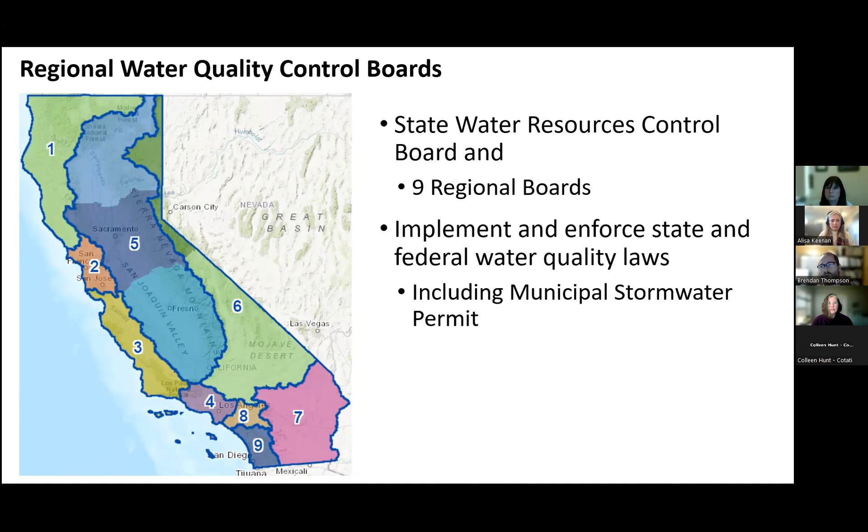And so the purpose of the training today, primarily it's a permit requirement of the permittees. And when I talk about the permittees, those are all the cities and the county under this stormwater permit here in the Russian River watershed. And the post-construction stormwater requirements under the stormwater permit are complicated, and they change over time, and they use this LID manual to ensure that projects are complying with the stormwater post-construction requirements.

And so every year we want to make sure that the regulated community is up to speed with what is in the LID manual. We want to make sure that the permit requirements and various interpretations of the permit requirements are discussed and understood, with the goal of ensuring we get consistent implementation of the stormwater permit. And also this training is a great opportunity to discuss the permit.

So I want to go over some terms and acronyms that you'll be hearing today. BMP is a big one. That refers to, in the world of stormwater, any structural or non-structural strategy to control stormwater. And when we're talking about LID, we're talking about low impact development, which is a specific subset of best management practices.

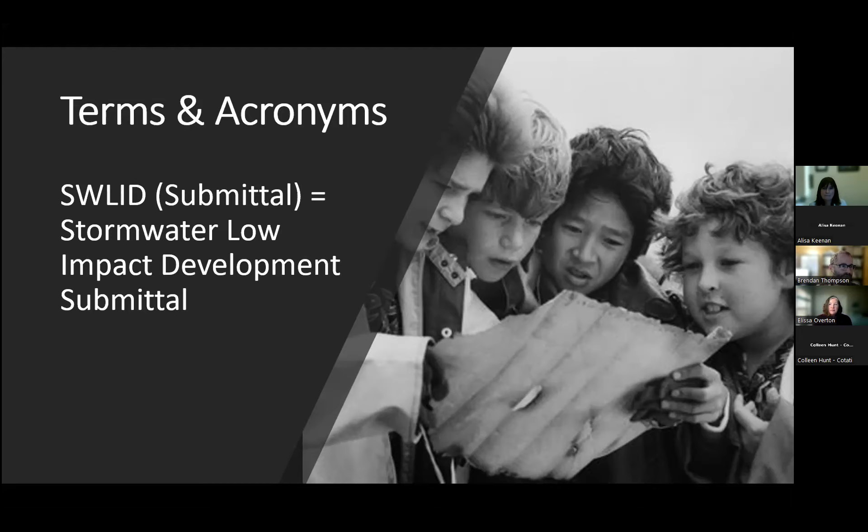TMDL, Total Maximum Daily Load. This term comes from the Clean Water Act, and it refers to the maximum amount of any given pollutant that a water body can handle and still be a healthy water body and provide the beneficial uses to people and the environment. And you hear it a lot because a lot of regulations are based on it. The TMDL in itself is not a permit requirement. Instead, it's a plan to bring an impaired water body into an unimpaired condition. And it uses permits to do that.

So when water board staff or planning staff develop a TMDL, they also develop an action plan. And part of the action plan is to recommend which specific permits should have requirements that will implement their action plan. And the MS4 stormwater permit is a major vehicle to implement TMDL requirements. So that's one of the reasons why we have these LID requirements.

For instance, our board recently adopted a pathogen TMDL to deal with bacteria impairment in the Russian River watershed. And we anticipated this back in 2012 when the current permit was adopted, and Santa Rosa and Sonoma County had to prepare pathogen work plans. And in the next permit, the rest of the permittees will have to do something as well to implement the action plan associated with the pathogen TMDL.

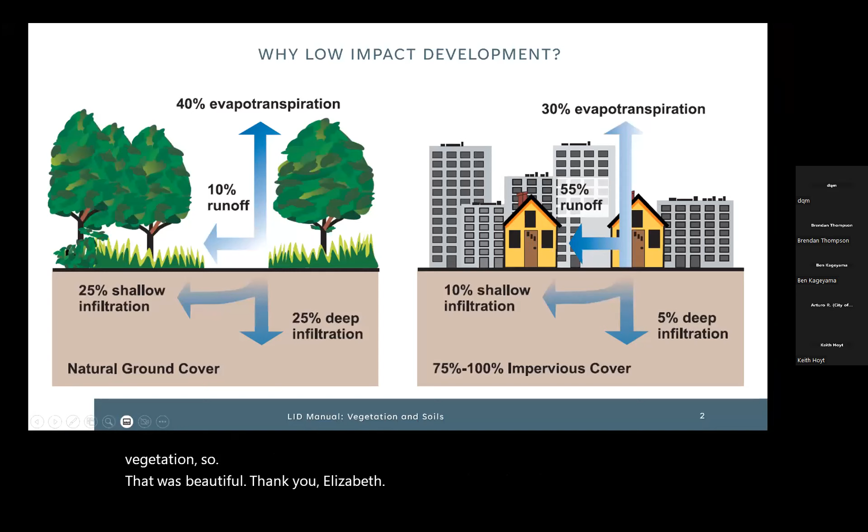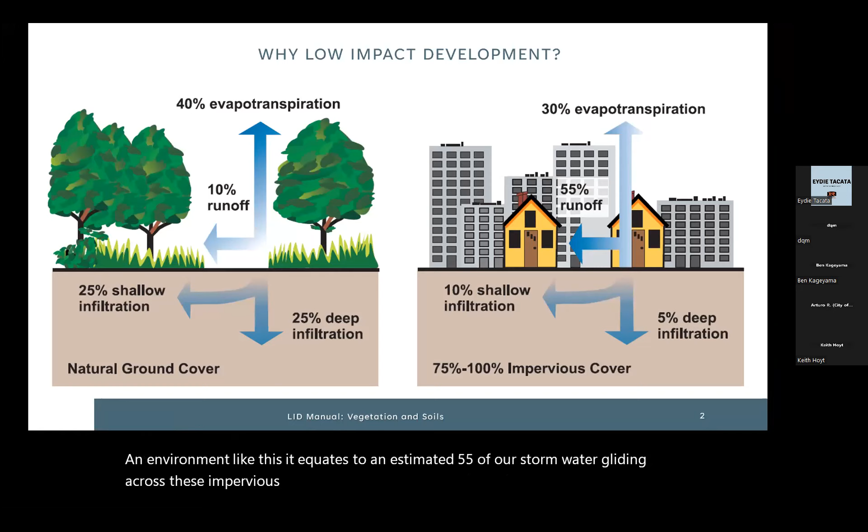So first, why are we so passionate about LID? In the image here on the right, there's a dramatic increase in the amount of hardscape that will not allow water to permeate or infiltrate into the soil and recharge the aquifer. In an environment like this, it equates to an estimated 55% of our stormwater gliding across these impervious surfaces like roads, parking lots, and rooftops. And it warms up that water and it gathers sediment, oils, tire wear particles, construction runoff, heavy metals, viruses, bacteria, nutrients from pet waste, and so on. So many constituents to list.

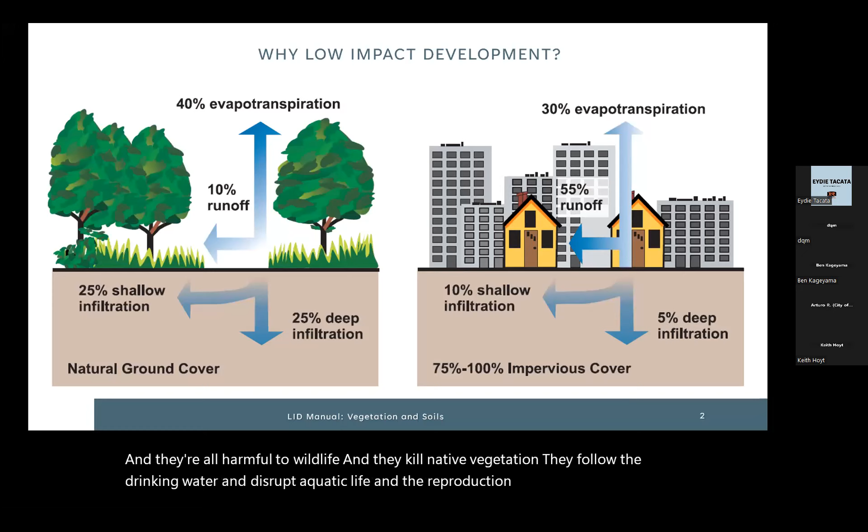And these constituents go directly into our streams, our rivers, our lakes, and so on. And they're all harmful to wildlife, and they kill native vegetation. They foul the drinking water and disrupt aquatic life and the reproduction cycle. The water is going to pick up tremendous erosional speed on these surfaces. So by the time it reaches these sensitive waterways, the excess volume can blast out stream banks, vegetation, and wipe out aquatic habitat. The stream bank can't absorb water fast enough at that magnitude, so it's going to cause flooding.

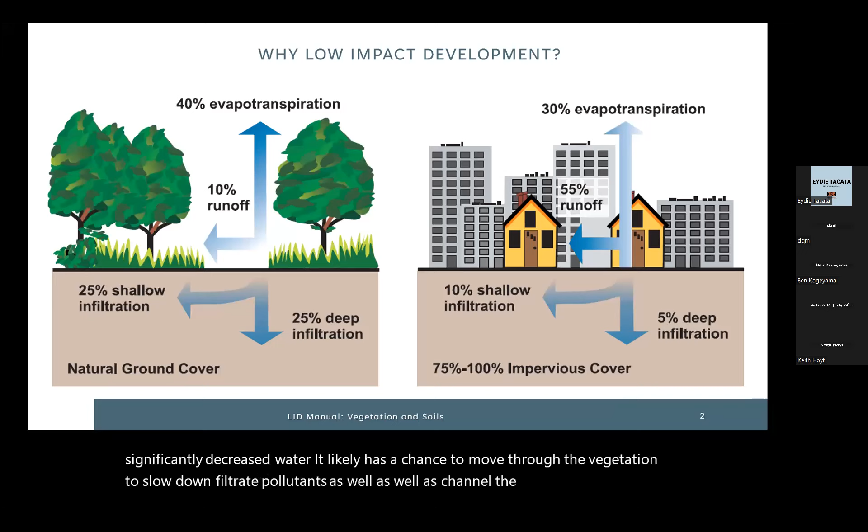In the image on the left, you'll notice that in a natural environment, the runoff is significantly decreased. Water likely has a chance to move through the vegetation, to slow down, filter pollutants, as well as channel the water deep into the aquifer. Notice there is a 20% difference in deep infiltration here. And evapotranspiration, well, that's going to increase as well.

This came up weird, so I have to click on the different screens to get this to progress. So sorry, guys.

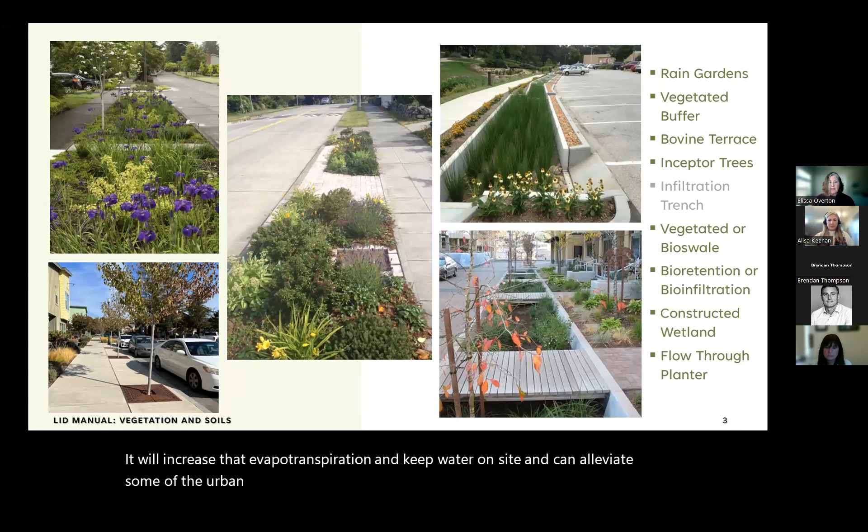So incorporating LID is just one of the ways we can reduce the impacts of development. By maximizing the surface roughness and creating infiltration and filtration opportunities, it will increase that evapotranspiration and keep water on site. It can alleviate some of the urban impacts to our water. Another great benefit is trees, soil, and the aquifer. They all will sequester the water, and that will boost our waterways during the driest months of the year when we see no rain, which is very typical in this region, as we all well know.

And not all LID features include vegetation. Those that do not, such as an infiltration trench, are part of a treatment train where the water is going to be introduced to vegetation at a different part of the path.

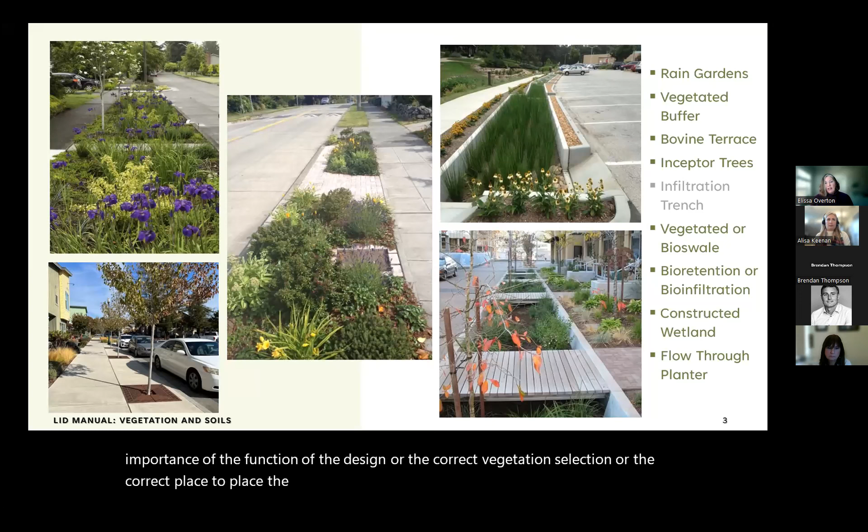And plant selection and design are very important pieces that are determining factors in the success of these features. But sadly, they're often left until the end, and the design is contracted to someone who wants to make it look pretty, and they don't understand the true importance of the function of the design or the correct vegetation selection or the correct place to place the vegetation. We find that these features are sometimes plugged into the design at the last minute, and there are potentially safety hazards.

So, for example, in this image up here on the left, you'll notice if you parked alongside this feature, it's going to be really difficult to get in and out of your car. So while beautiful and functional to clean water, it's not functional for pedestrians.

Great solutions are shown in this middle photo with pavers, or down here with these cute little path bridges up to their front steps.

Up in the right-hand corner, this parking lot, great, you can get in and out of your vehicle, but there hasn't been a lot of thought to the pedestrian foot traffic. You need to get from point A to point B. You're going to need to cross over this feature, and stir up sediment, compact soil, kill vegetation. Not a lot of people want to walk all the way around. They'll take the path of least resistance to get from point A to point B.

Another thing to think of is tree placement or high bush placement. If they're put out on a corner, they can obstruct oncoming views such as traffic, and that's another safety hazard.

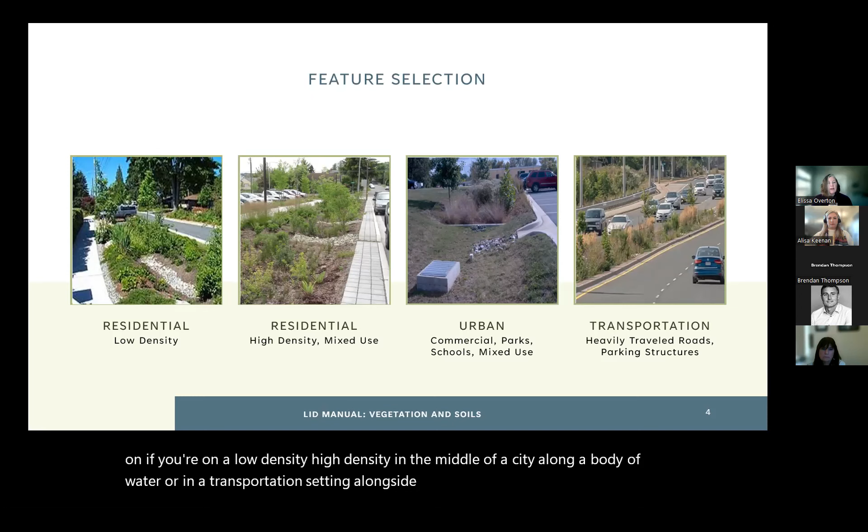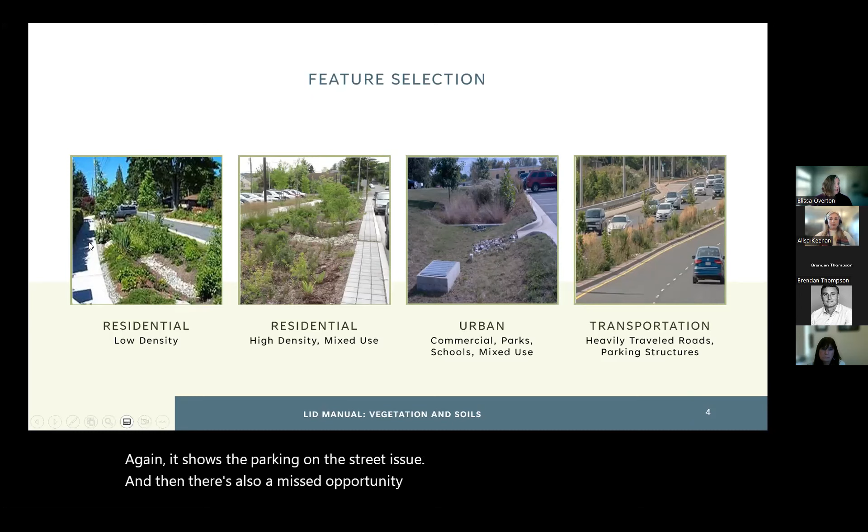So the types of plants and features you choose may be different depending on if you're in a low density, high density, in the middle of a city, along a body of water, or in a transportation setting alongside the road. The residential image, again, it shows the parking on the street issue. And then there's also a missed opportunity here to plant the lowest level of this swale. We really want to get those grasses in there, the sedges and the rushes, to slow the water, infiltrate and permeate water into that soil.

Rocks, while sometimes beautiful, can really dry and heat up the soil, and it will make it difficult to maintain. Weeds love that rocky environment, and it will make it difficult to pull them if the soil is pushed down with the weight of the rocks. And if you put fabric underneath those rocks, it's ultimately going to just clog.

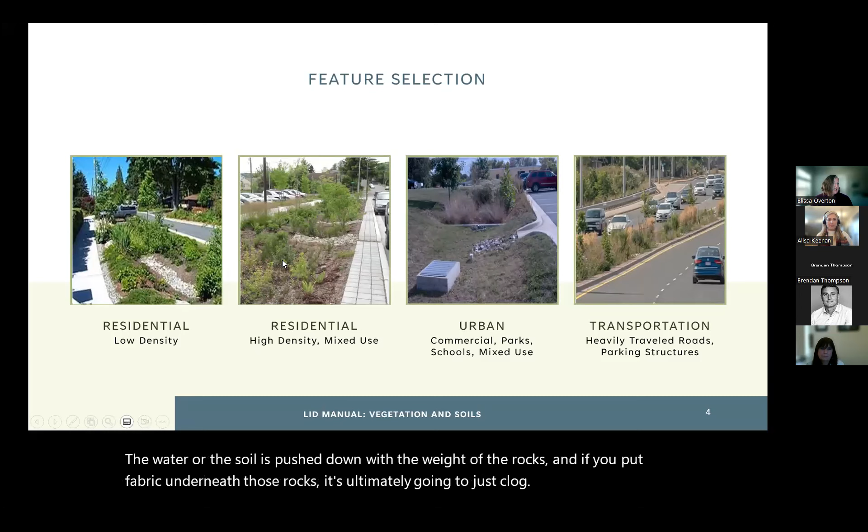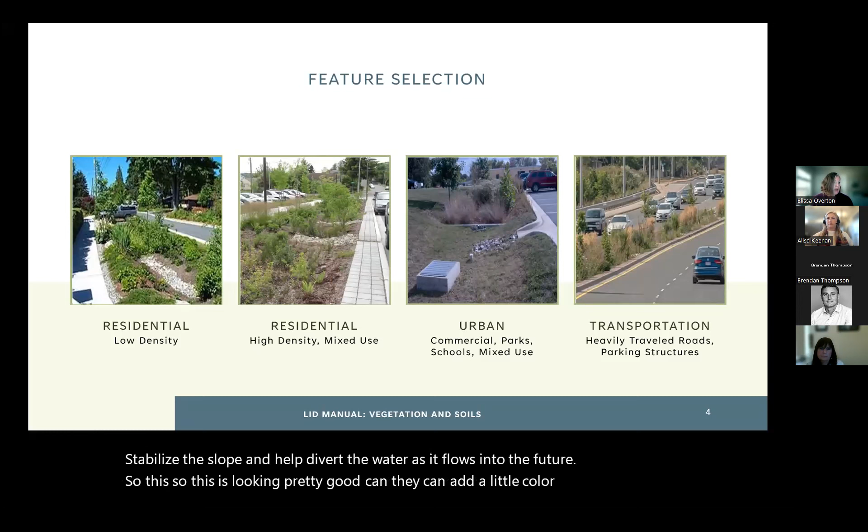The high density residential, I really like the rocks that they've placed to stabilize the slope and help divert the water as it flows into the feature. So this is looking pretty good. They can add a little color, and they've corrected the street parking issue here.

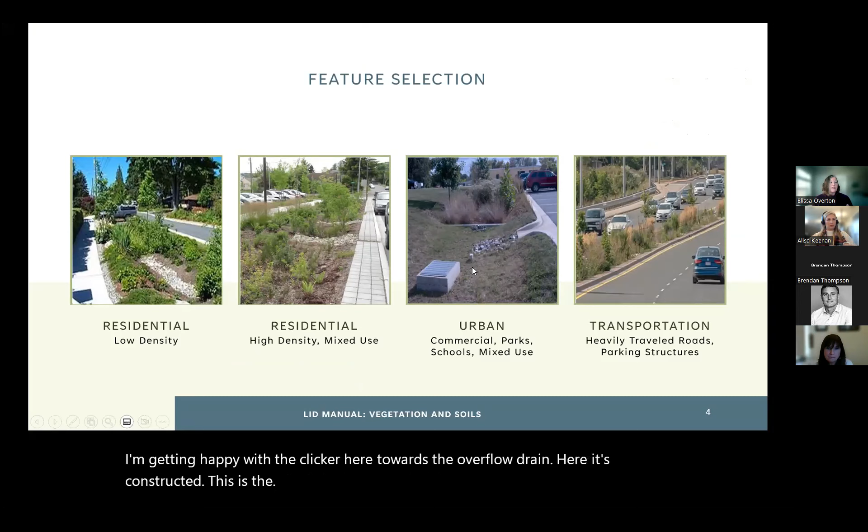The urban setting, now while I wish they had planted further in towards this, woo, I'm getting happy with the clicker here, towards the overflow drain here. This is the thing I want to note on this: it's constructed at the correct height. The function of this feature is for water to come into it and fill up to allow it time to permeate, not over 72 hours, because we don't want to add other issues such as mosquitoes or flooding. But we don't want these drains like you would construct your bathtub or sink. We need them raised up to allow that water time to infiltrate.

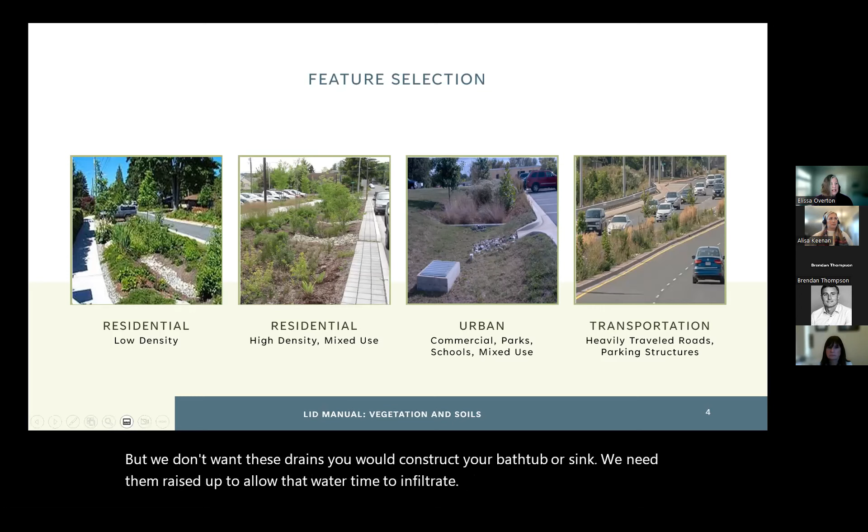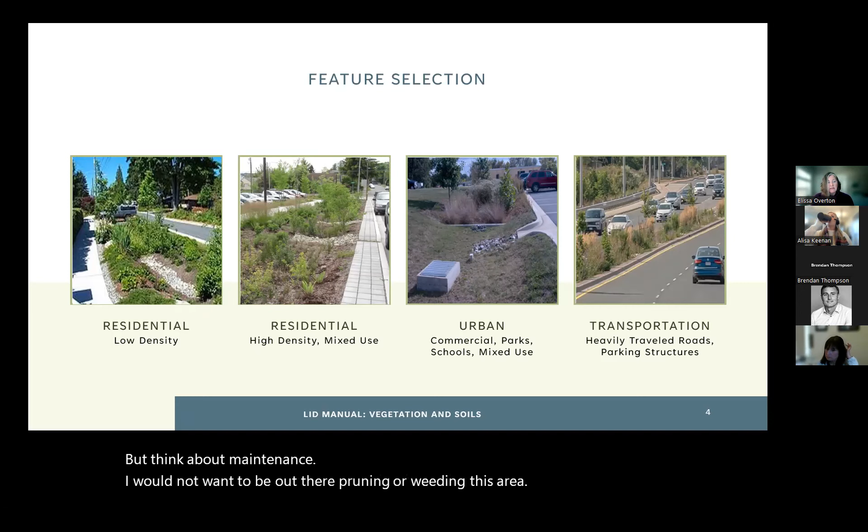Transportation. This is great for source pollution control. There's little inlets to let water into that vegetative strip in the center of the busy 4-lane road. But think about maintenance. I would not want to be out there pruning or weeding this area. And also it could potentially obstruct views if there's an area further up where you can turn in or out. So just really be mindful in your design on placement of these things.

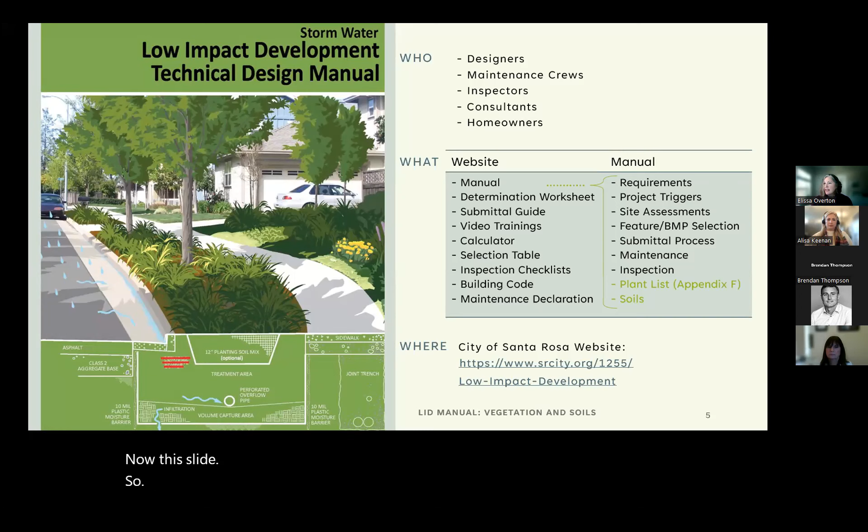Okay, so now this slide. This is the LID manual, and Edie, I can't access the chat, so if you wouldn't mind pasting the link in the chat to get to this manual on the City of Santa Rosa website. I know many of you are already using this manual, but we have people of different experience levels on the call. So I just wanted to quickly direct folks to this manual and what a great tool it is.

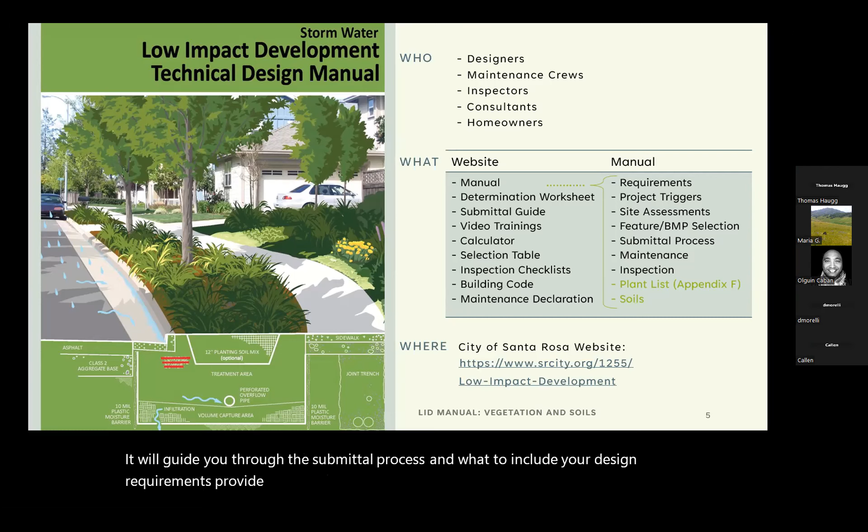It will guide you through sites that will trigger LID, help you with feature selection in natural areas, pollutants of concern, trash capture. It will guide you through the submittal process and what to include, your design requirements, and provide useful calculations and formulas such as hydromodification control requirements, 100% treatment requirements, and delta volume capture. Maintenance and inspection requirements are included, as well as the BMP fact sheets that outline feature details and inspection checklists for each type. And of course, our plant list is included as Appendix F, and soils, which Elizabeth will be going over in just a moment.

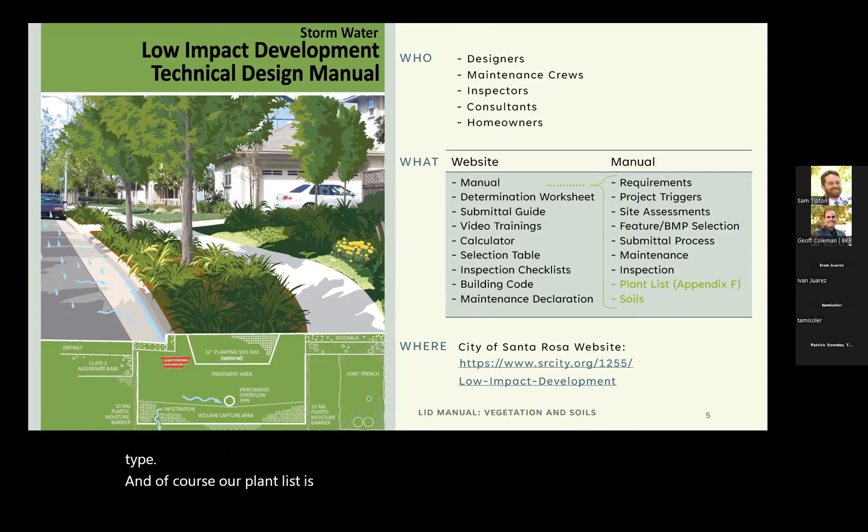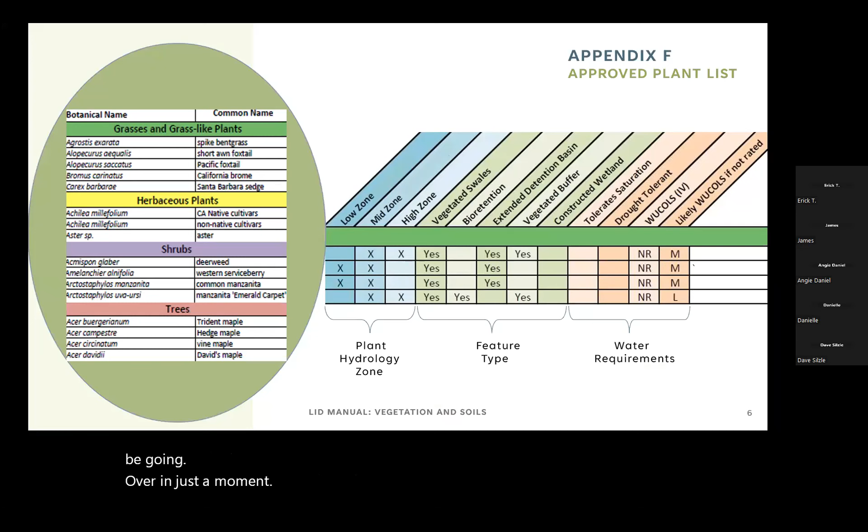So here we have a little cutout of Appendix F. You'll see where the plants are separated by growth structure. So your grasses, herbaceous, shrubs, and your trees. Now, this is just a little clip of it. These lists are very long, and there's pages of ideas for you, for your plants, planting your features.

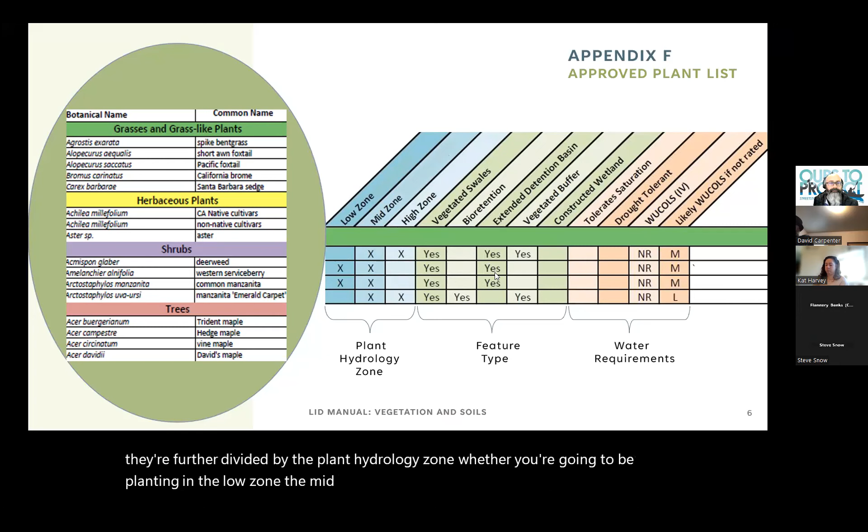And then they're further divided by the plant hydrology zone, whether you're going to be planting in the low zone, the mid zone, or the high zone, the feature type. So you'll see the different types of features listed up here, and the plants are listed on the left here. And then the water requirements that those plants have. So it's really useful.

So what's the big deal about plants? We're really asking a lot of them. Well, basically, they're the janitors, the cleanup crew. They're going to provide filtration of sediment, the constituents, keep the mulch from going down the drain, and the trash. They clean the air through carbon sequestration.

They're plumbing. So through infiltration, they're going to drive water back into the soil to replenish groundwater supplies, recharge the aquifer to redistribute the vegetation in the dry months, and help maintain the base flow to our streams, rivers, and wetlands. So really important stuff.

They provide housing for different types of species, create different ecosystems. Habitat is a really beneficial part of these features. The food, they're going to attract food for different types of birds and other species, and they can support pollinators.

They are the HVAC, so they create microclimates to allow species to keep warm in the winter or cool in the summer, counteract the harsh rising temperatures of hardscape. Structural engineers, they're going to stabilize that soil and prevent erosion and stop additional sediment from entering our storm drains, thus suffocating and preventing fish eggs from hatching in our streams and rivers.

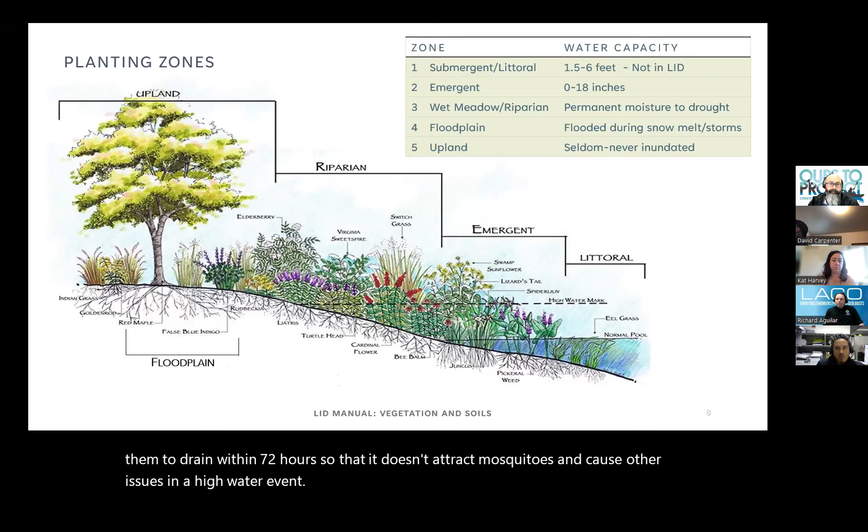The emergent riparian section, that's where we're really going to focus on that low level planting. It's the lowest point of the LID feature and should be planted in a way that can slow and filtrate water. That's the main function, and stabilize that soil. They need to be able to withstand full saturation as well as drought conditions in the dry months. Grasses and sedges, those are the workhorses in this section.

Grasses and sedges, they have the deep fibrous root systems that not only hold onto the soil, but they form numerous root channels. So they really stabilize and promote water soaking deep into that soil. The soil part, Elizabeth will dive into some more later on.

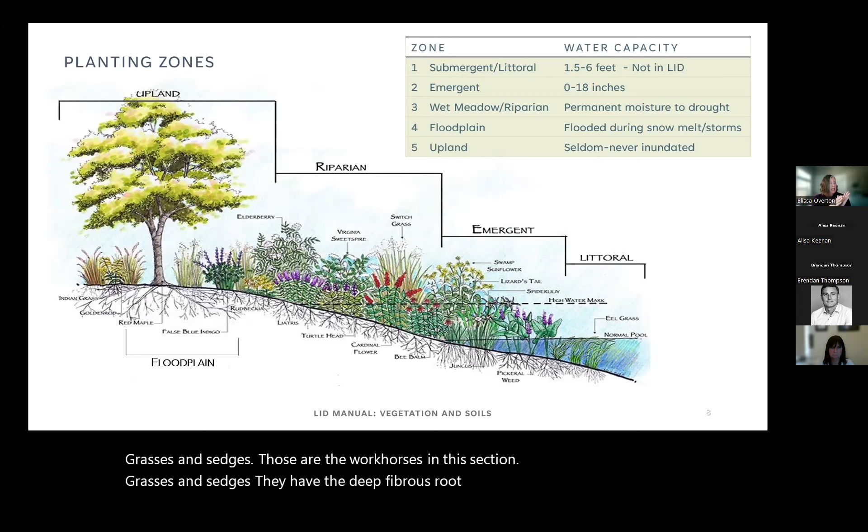The riparian and floodplain areas. I have floodplain down here. It's kind of a mixture between the riparian and the upland. You're going to want to use this area as your beautifying area. So, you know, salvias, sages, spice bushes, wax myrtles, blanket flowers, all these beautiful types of plants can be planted in this area because they can withstand more water, but then also be able to handle a drought. Because sadly, that's what we are undergoing right now.

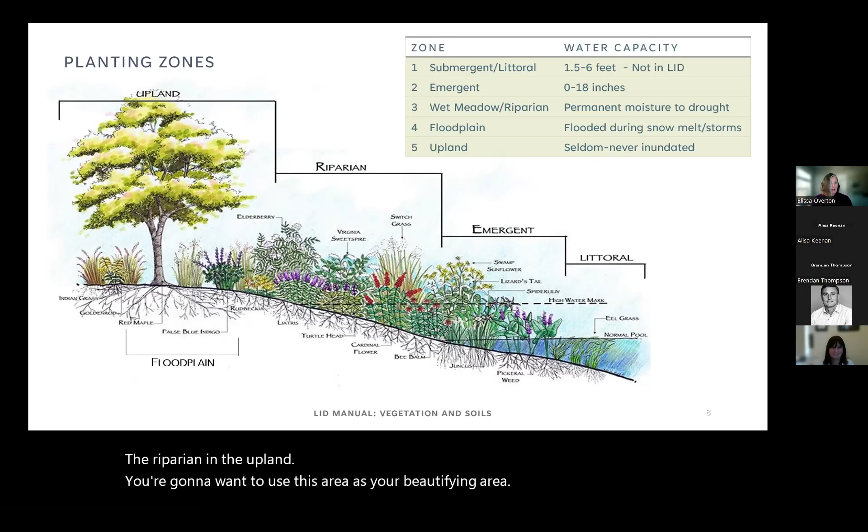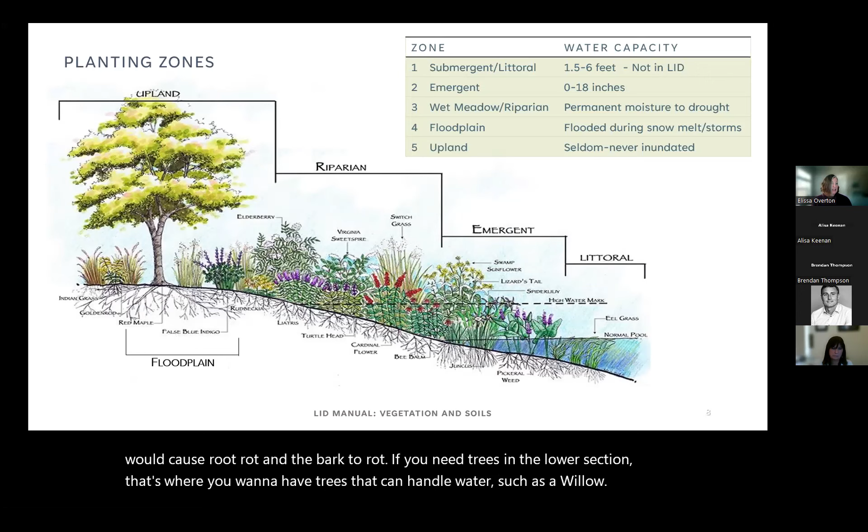And then in your floodplain, upland areas, that's your opportunity to put your trees that can't stand full saturation because it would cause root rot and the bark to rot. If you need trees in the lower section, that's where you want to have trees that can handle water, such as a willow. And then up high, you want your drier plants to use as beautification and shade and habitat, and really promote the aesthetic value of these features.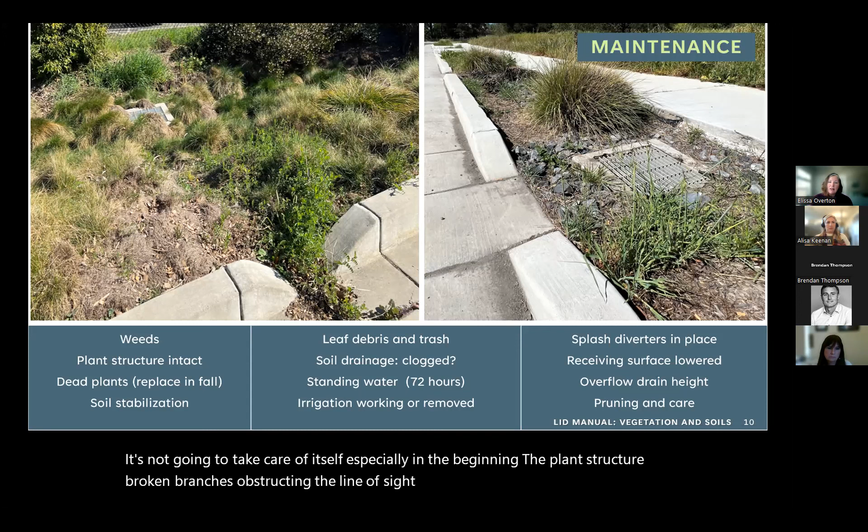The plant structure, broken branches, obstructing the line of sight, or just for overall plant health, they need to be taken care of. Dead plants, replant them, preferably in the fall, so they can get the benefit of the water during the wet months of the year. Tree debris, so if you have trees, deciduous trees and evergreen trees both shed needles and leaves, so that needs to be picked up.

And my natural resources geek side, that sometimes is hard for me because I want to allow those things to fall and replenish the soil, feed the soil, and I think of the microbes and all that stuff. But these types of features, they're not for that. There's other opportunities to create that in our communities. These are assets, they have a function, they need to remain clean and free of that debris.

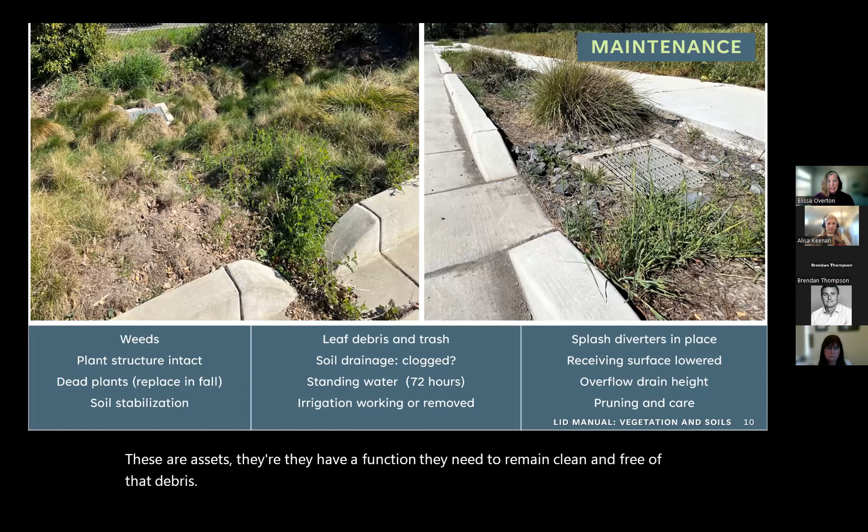Soil stabilization. So make sure that those plants are alongside the slopes of the feature so that it really holds on to it and isn't adding to the sediment issue. Irrigation. So this is a big one. I come out to these sites and it's just a mess. The emitters are not within the root zone.

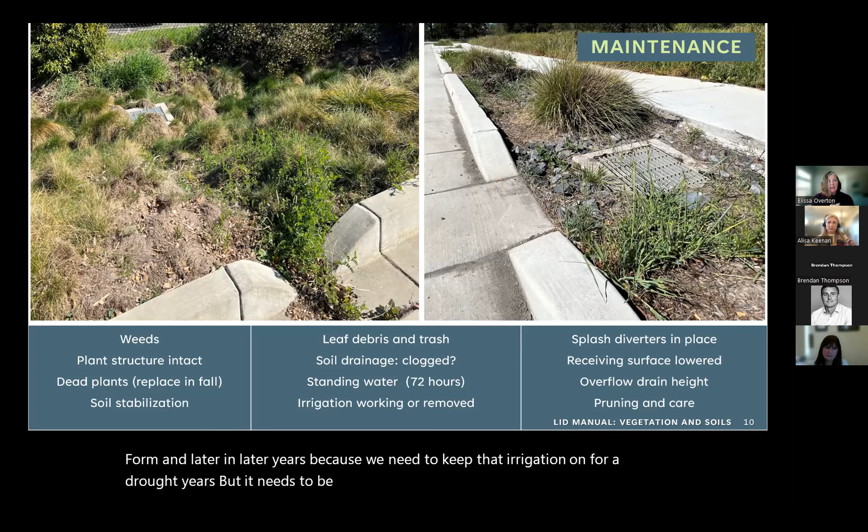The root ball of a plant in the first couple of years of life is immediately under that plant, and those emitters need to be directly on top of the soil, providing that plant with water. Off to the side will work as those roots really start to form in later years, because we need to keep that irrigation on for drought years, but it needs to be regularly irrigated in the first couple of years. So that's another misconception. Just because they're low water use, that's after establishment.

So splash diverters, those are another thing that are very important. We see those just kicked to the side or all over the place, and those are really going to stop that high water flow, preventing erosion. And then overflow drains. So I mentioned before that nice overflow drain that was really high up. Look at this one right here on the right. It looks like a sink drain.

So what's going to happen is water, if it can make it in there through the rocks, it's just going to go directly down in that drain, and it's not going to receive the benefits of the plants. While weeds are still going to provide benefit, they're not going to provide aesthetic value. And then pruning, again, making sure that this inlet is clear so that the water has a chance to come through here and go through the sedges and the rushes before it enters the drain, and ultimately it would pool around here, and this would only be an overflow situation.

And then you'd want planting. These need to stay over 50% planted to be functional. So this is just going to cause sediment to rush down here. In this scenario, over in this area, there is a trash receptacle hut for this community building.

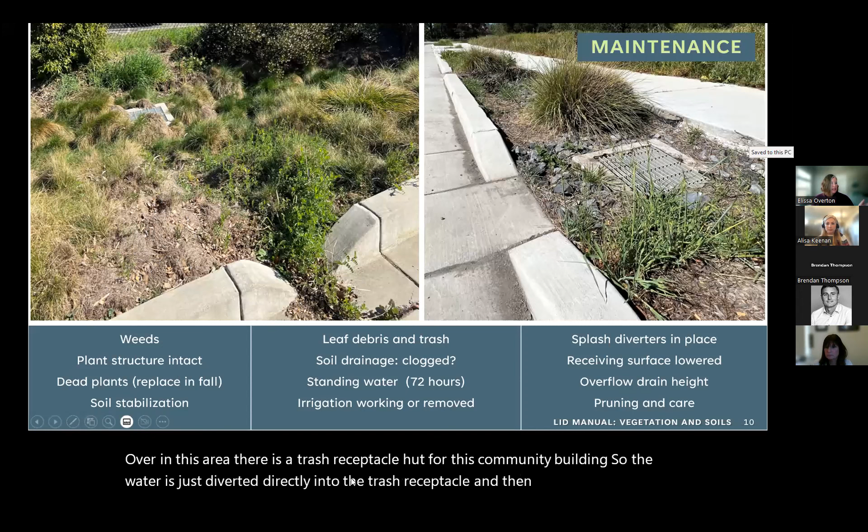So the water is just diverted directly into the trash receptacle. And then there's further LID features on the other side. So it goes through the trash area and then into another LID feature. So it should be entering here and diverting the trash area, ideally.

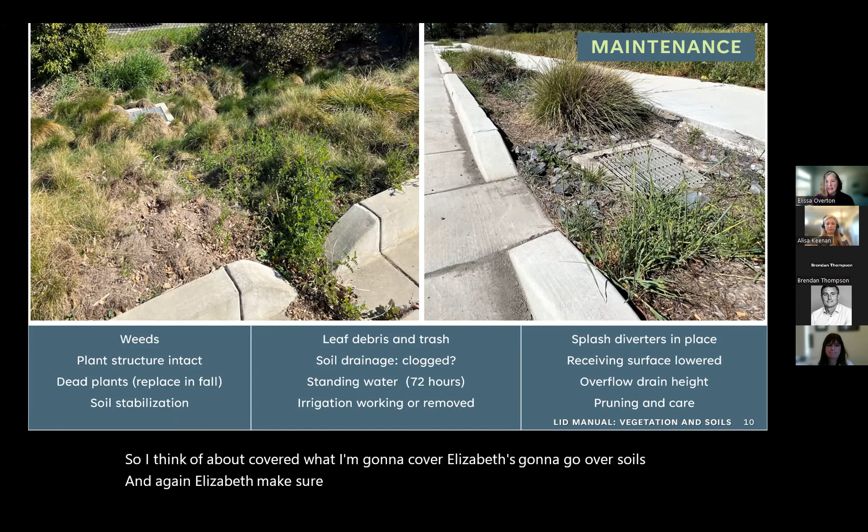So I think I've about covered what I'm going to cover. Elizabeth's going to go over soils, and again, Elizabeth, make sure you add in anything I might have missed in my spiel here. Okay, thanks. Okay, let's move to the next one there.

Thank you. Okay, so let's talk soil, media, and mulch. Whoops, go back. Not yet. There you go. Okay, so what's the problem here? So terminology, consistency. We need consistency in our LID terms, from the stormwater LID report through design, construction, and landscaping installation. So the team of those involved from design to maintenance can really understand the intent of the feature. So let's take a deeper look at the terms.

Next slide. Oops. My mouse is really happy here. Back one. There we go.

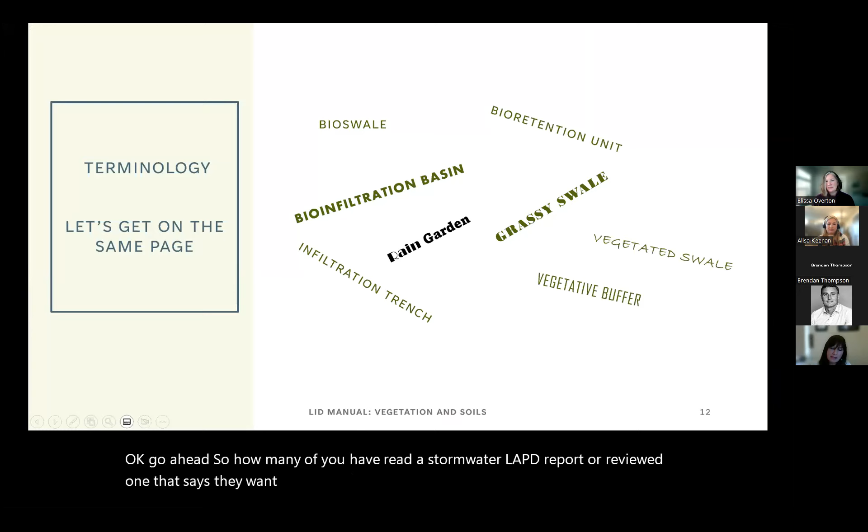So how many of you have read a stormwater LID report or reviewed one that says they want to install a rain garden? Oh, but then the plans call it a bioretention BMP. And then the maintenance plan calls it a vegetated swale. The contractor calls it a grassy swale. And the landscaper, who's just getting familiar with these features, calls them all just bioswales. We have to separate these terms and use them consistently. Next slide.

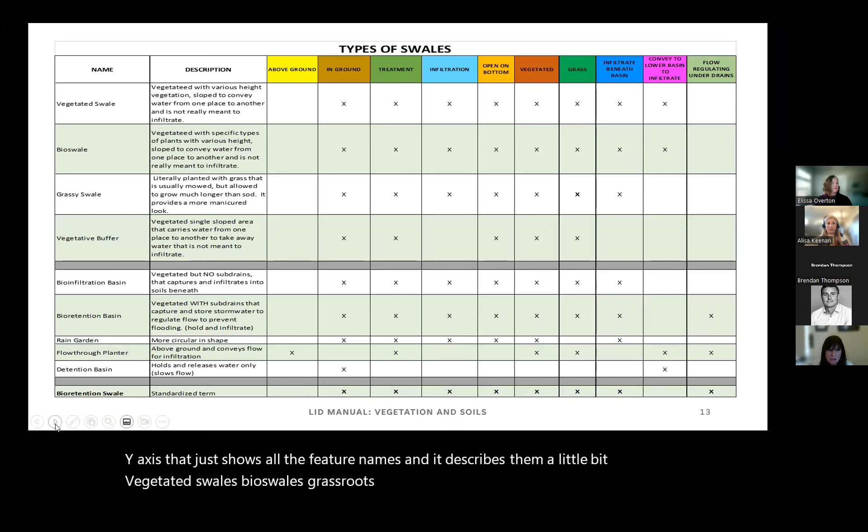So I created this table to better understand the differences between these. So on the left, there's the y-axis that just shows all the feature names, and it describes them a little bit, you know, vegetated swales, bioswales, grassy swales, vegetated buffers, bioinfiltration basins, on and on. On the x-axis, it shows the various variations in function. This is really important to understand the differences, so we can use these terms more consistently throughout all of our jurisdictions. And it can be used to train the contractors and landscapers better.

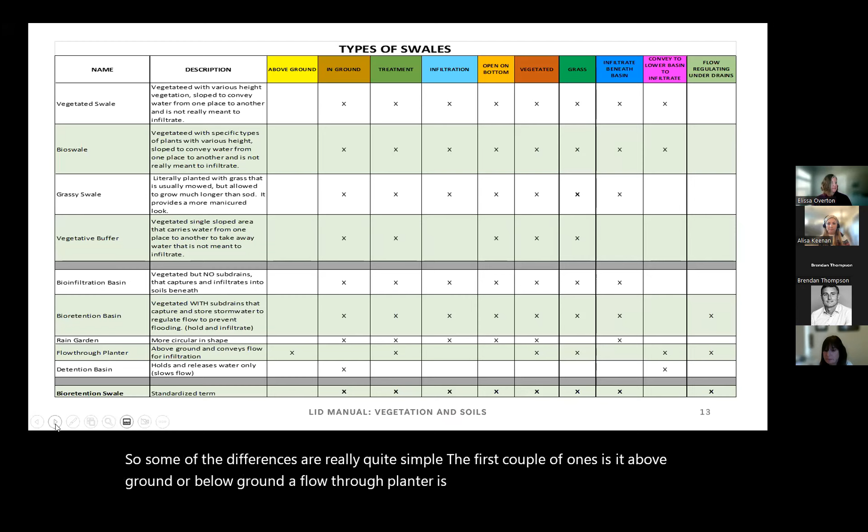So some of the differences are really quite simple. Like the first couple of ones: is it above ground or below ground? Well, a flow through planter is above ground. A swale is not, period. There, you're done. The shape: if it's a circular shape, more like a rain garden, or linear like a swale. If it's linear, call it a swale. Don't call it a rain garden.

If it's on a single slope, it's not a swale. A swale has a parabolic or a trapezoidal shape. These single sloped features are more like vegetative buffers. If there's an underdrain infrastructure, then it's bioretention. It's not a bioswale. And if there are plants or not, it's a bioswale and it's not an infiltration trench. So let's look at a few examples. So move on to the next one.

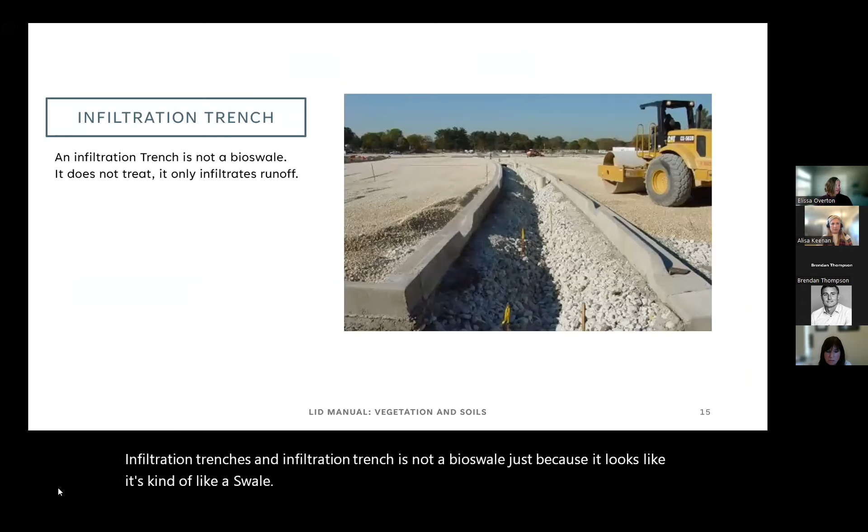Infiltration trenches. An infiltration trench is not a bioswale just because it looks kind of like a swale. It doesn't have plants and it doesn't provide treatment. So don't call this a bioswale. Call it the infiltration trench. Next.

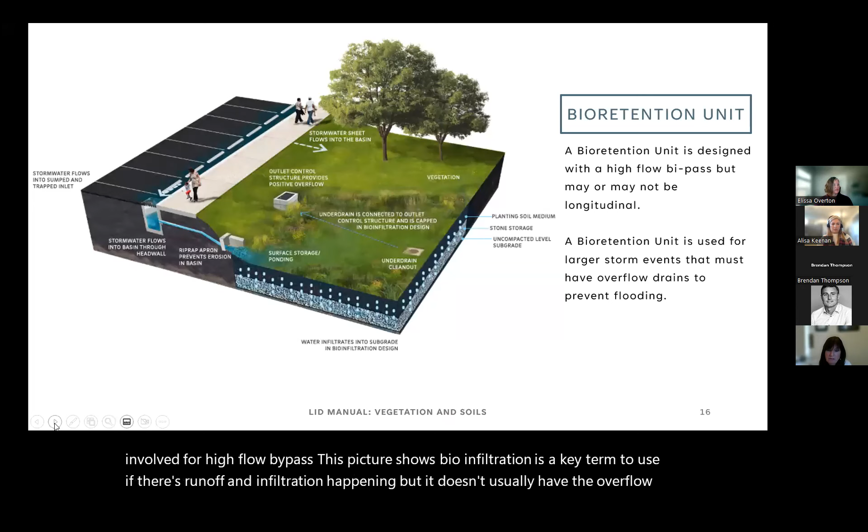So bioretention is used if there's piping involved for high flow bypass, like this picture shows. Bioinfiltration is a key term to use if there's runoff and infiltration happening, but it doesn't usually have the overflow pipes. If there's overflow piping, use the bioretention term, don't use infiltration. These terms are important to distinguish between our LID features. And it's also a good idea to go over these features at, say, your pre-con meetings with your contractors so they can fully understand the purpose of each of these features and the delicacy of these features.

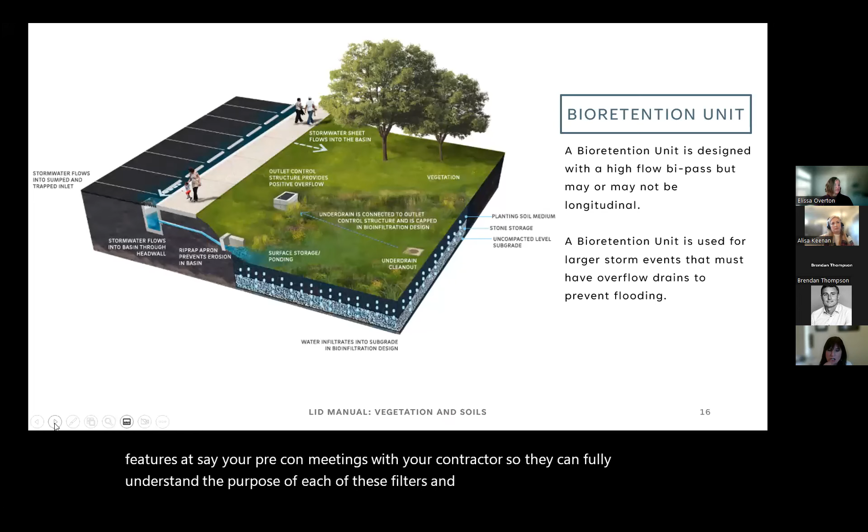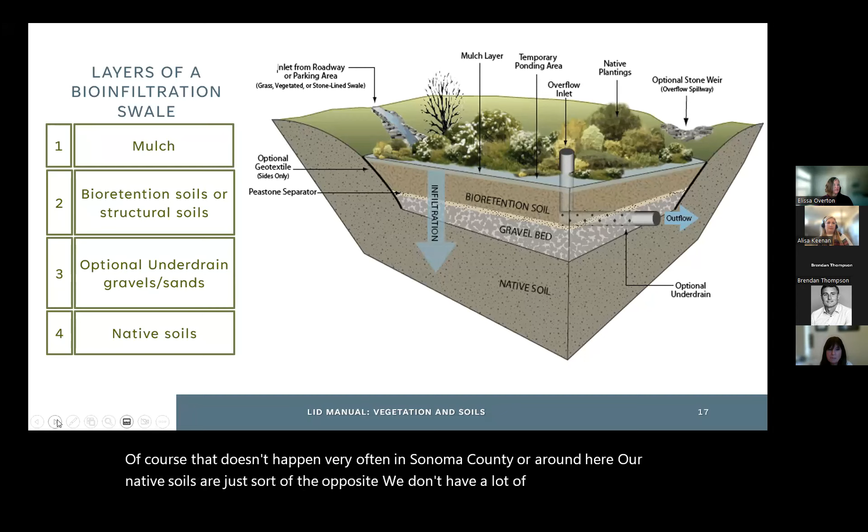Next. So let's talk a little bit about soils. Oops, I think you missed one. Oh, okay, let's talk about soils. Go to the next one.

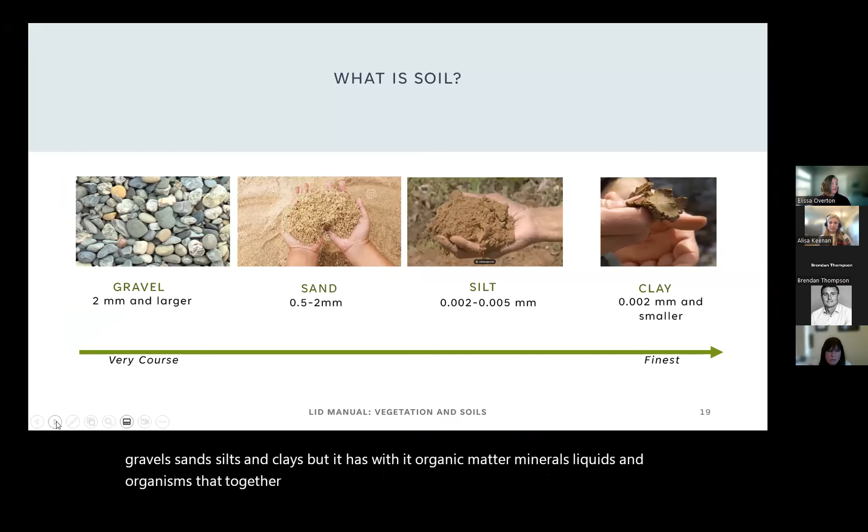Okay, there we go. So what is a soil? Let's talk a little bit about that. So soil is a mixture of sizes of grains of gravels, sands, silts, and clays, but it has with it organic matter, minerals, liquids, and organisms that together support life. So how do we characterize the soil? For our purposes, we'll characterize the soil by the size of the particles. The LID manual separates the soils into hydrologic groups of A, B, C, and D. But let's see how this relates to the particle size.

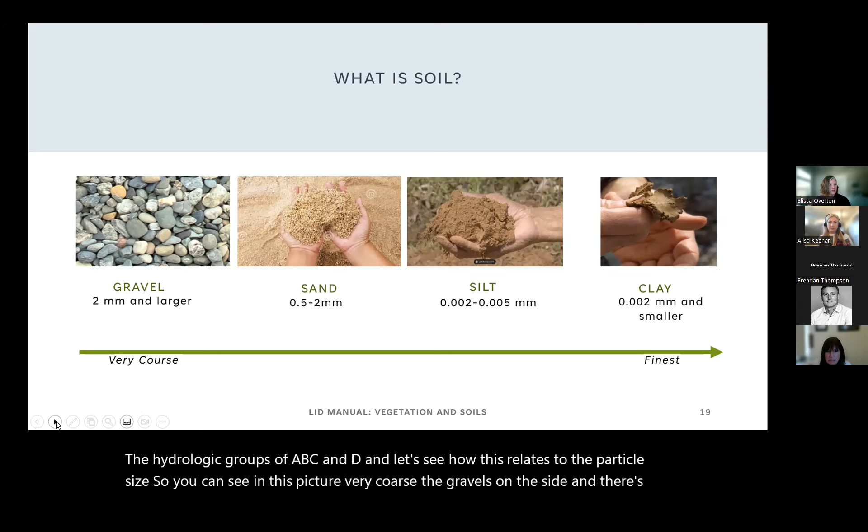So you can see in this picture, very coarse, the gravels on the side, and there's some sizes there that help you understand it. But the photos really show you what these look like when you're in the field. So when you get down to the silts, you can see it's a lot finer than the sand, and you really can't see the particles. And when you get into clays compared to silts, they tend to be a lot stickier. They stick together very well. Next.

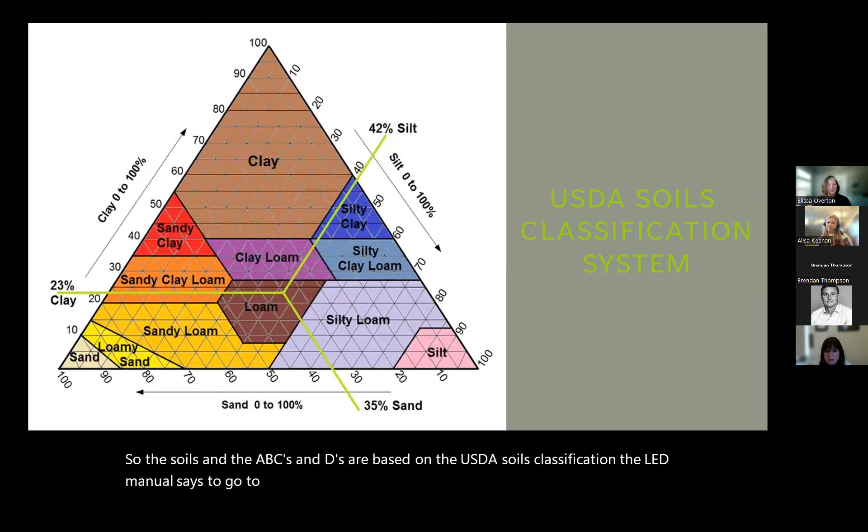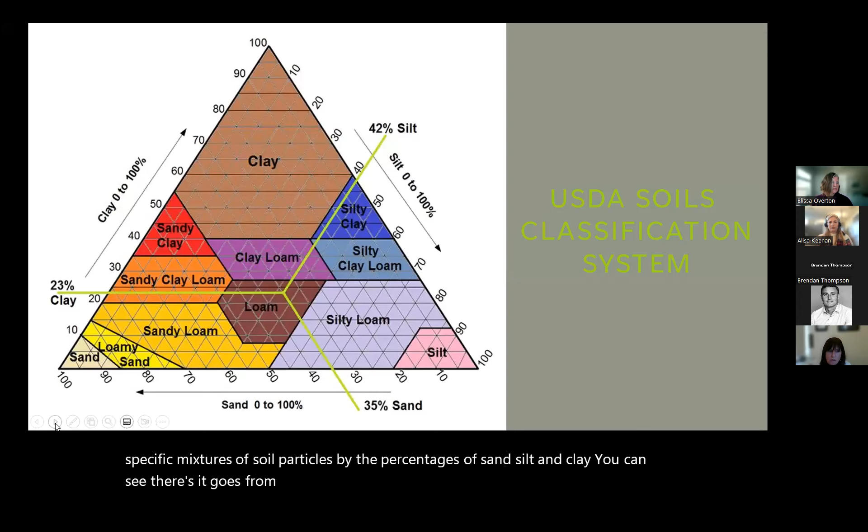So the soils and the A, B, C's, and D's are based on the USDA soils classification. The LID manual says to go to the Natural Resources Conservation Service or the USDA to identify what types of soils you have. What does this mean? So here's how it works. Soils are typically shown in this triangle where it gives the specific mixtures of soil particles by the percentages of sand, silt, and clay. You can see it goes from 0 to 100 on each side of the triangle for clay, sands, and silts.

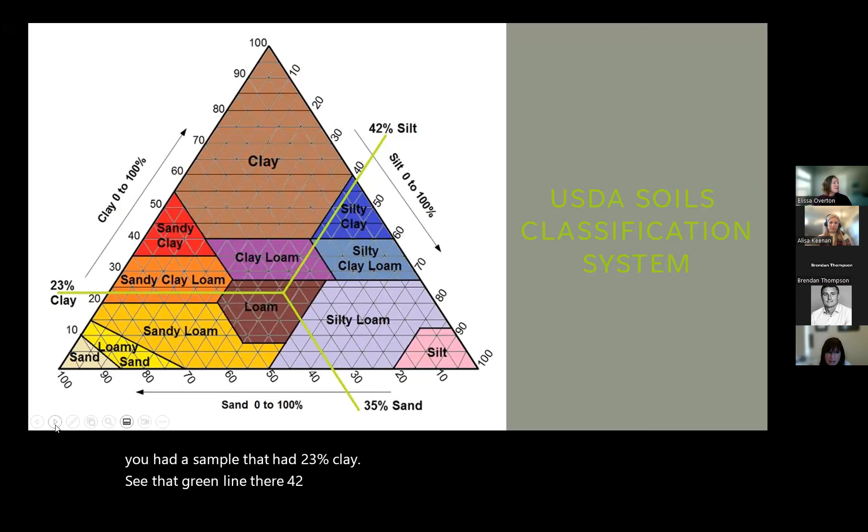So to classify a soil, you determine the percentage of all 3 particle sizes and graph it to determine what soils you have. So there's green lines on there. Say you had a sample that had 23% clay, you can see that green line there, 42% silt and 35% sand. And where those lines line up together, that tells you what kind of soil you have. That's a loam. The loam is kind of in the middle. It's similar amounts of all 3 particle sizes. But the names of the soil will determine which hydrologic group it's in, A, B, C, or D. So let's go to the next one.

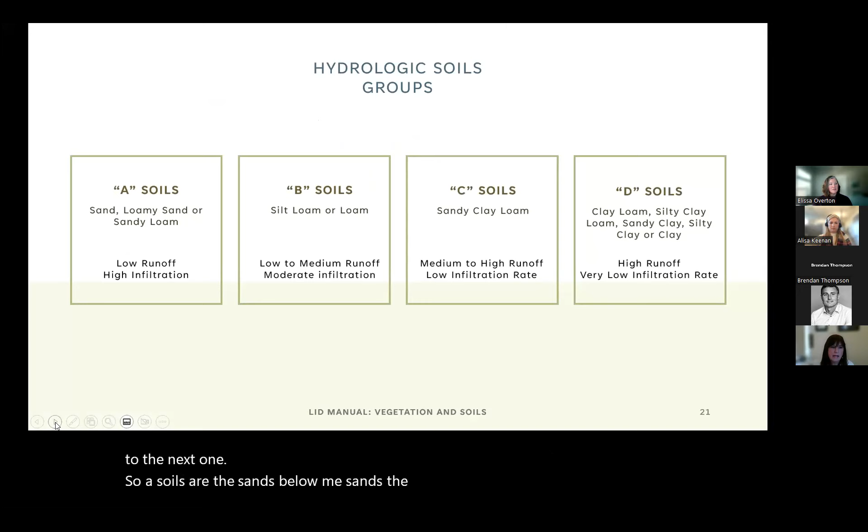So A soils are the sands, the loamy sands, the sandy loams. They, of course, have low runoff and high infiltration. And then it goes on down the line. The B soils are more silty and loamy. C soils have a little more clay in them. And D is where you're going to have all of your clays and they have very low infiltration rates.

So when we want to put these 2 things together, the hydrologic soils and the USDA soil charts, I'm going to go to the next one. This is kind of a visual where I tried to overlap them. So you can see the type A soils are going to be in blue on the lower left-hand corner for the sands, the loamy sands, and the sandy loams. And then it goes on down to the different B's, C's, and D's. And the D's are going to be more like all your clays.

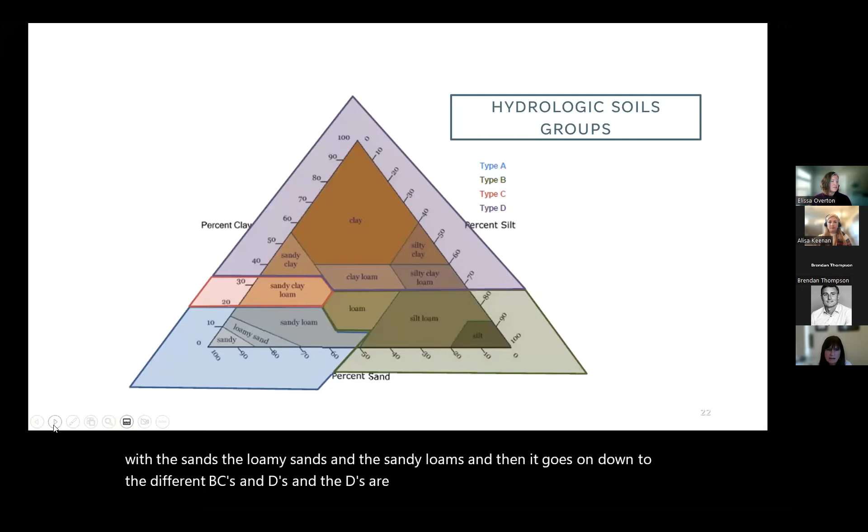And once you have over about 35% clay, you're going to be in hydrologic zone D. So the engineer looks up the USDA soils for their particular site, and then they determine the soils that likely exist for their project to use in their design of LID features. However, it's important to understand that the USDA soils maps are intended for agricultural use and growing crops.

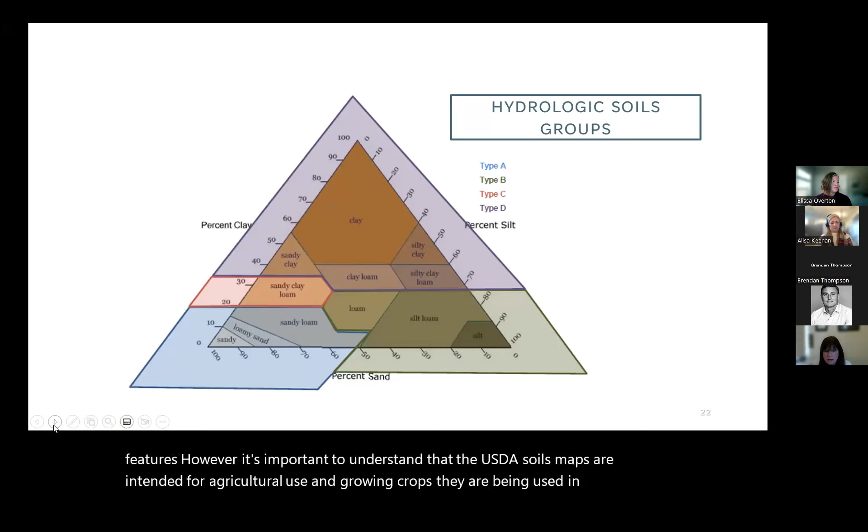They are being used in the LID manual for infiltration, and that's important, but they're not exactly created one for the other. So the map gives you the idea of soils as an approximation for the near surface soils, but it's not site specific, and the data is actually pretty old that they've used.

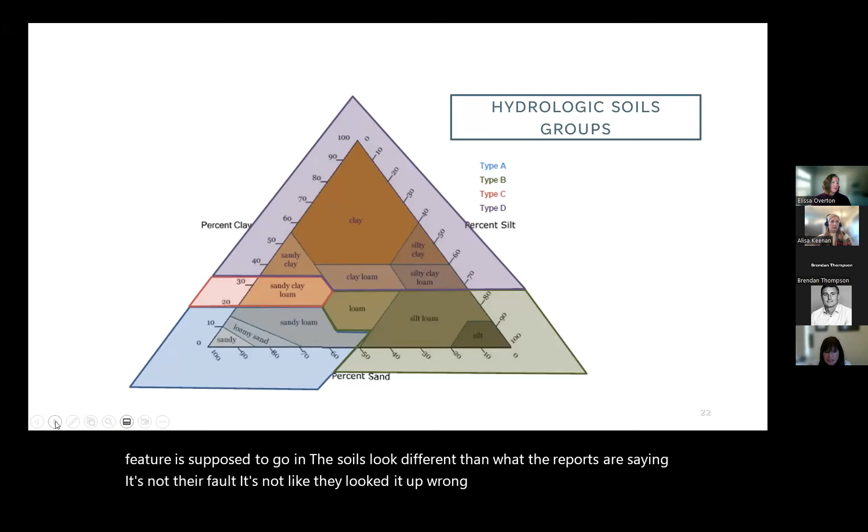I've seen more than once where the contractor digs up the area where the LID feature is supposed to go, and the soils look different than what the reports are saying. It's not their fault. It's not like they looked it up wrong. It's just an approximation. It doesn't always totally match. Okay, go to the next one.

So where can you get the information you really need to make sure? Well, it would be to do site specific. So I go to the geotech report. However, when a geotech engineer goes out to your site, he classifies the soils for strength for foundations and uses the unified soil classification system. They still classify it by grain size, but they use other things like plasticity, organics, and gravels in the nomenclature.

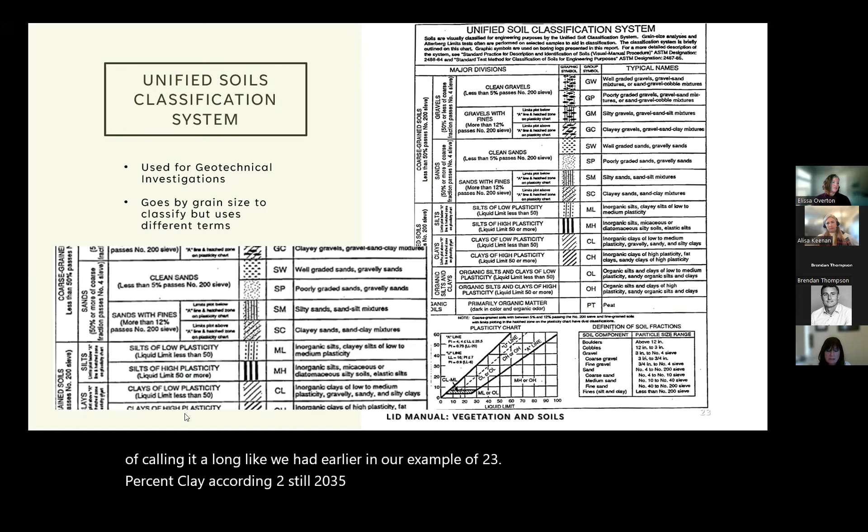Instead of calling it a loam like we had earlier in our example of 23% clay, 42% silt, and 35% sand, they would call it an ML or a sandy clay silt, depending upon the plasticity of the soils. In other words, you can't go directly to get the information in the geotech report unless you ask them to give you the percentages of sand, silt, and clay to match your USDA soils type in the triangle to determine your hydrologic groups that you need to know for infiltration.

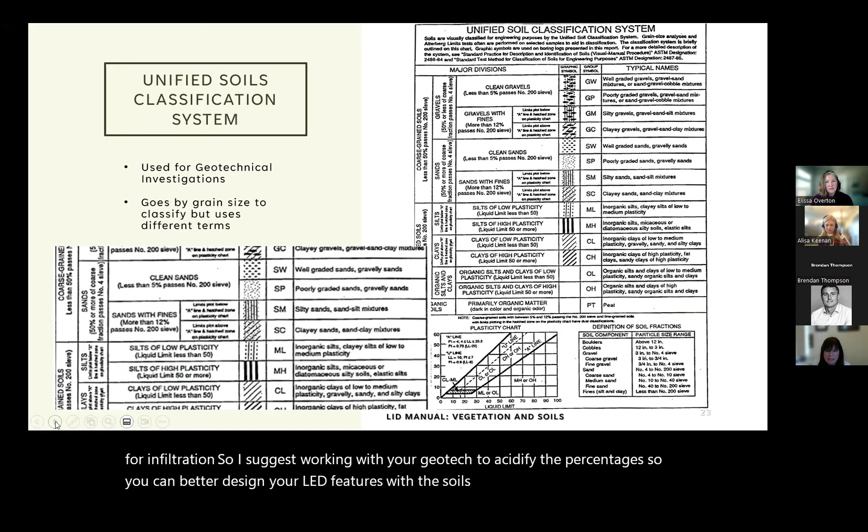So I suggest working with your geotech to identify the percentages so you can better design your LID features with the soils that are actually present at your site. They could simply do one extra boring and do a shallow boring on your site where an LID feature is going to go. And then you know exactly what kind of soils you have, and you will not be surprised during construction, hopefully, to see that your soils will match your design.

All right, next slide. All right, let's talk about these soils, structural soils. This is going to be the types of soils that are installed above the native soils where the native soils can't be used. So structural soils, what are they? So they're subangular, usually the gravels here with some fines and organics that allow for the ideal infiltration. That's the key. But as the name implies, the soil is used for load-bearing capacity next to roads and buildings. If not near these, then soils could be used.

But this is engineered soil. It's special soil. It's well graded, usually medium and coarse sand. It's subangular. That helps lock the soils together and preserve the voids. And it's usually washed to remove the fines and maintain the porosity. And then they blend it with organics. They have high quality mineral soils mixed into the plantings. This is not class 2 perm soils. It has some organics in it to allow for the planting.

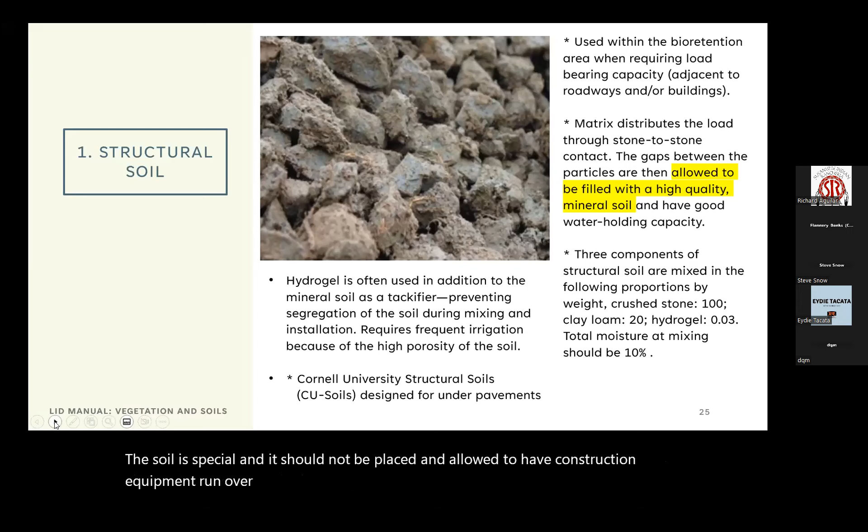And then a lot of times it'll have this hydrogel that's added as a tackifier, and it prevents segregation of the soils and the rocks. Then it's moisture controlled to be able to compact it correctly. This soil is special, and it should not be placed and allowed to have construction equipment run over it or have construction sediment flow into it. It needs to be protected.

I've seen sites where they've put in their LID feature early in construction, and I've seen house paint, nails, construction debris, and even stucco sitting on top of this soil and their LID features. So please keep these protected once you put the soils in.

So what makes it special? Same thing as a structural soil. It's well graded, coarse and medium fine and medium sand. It's subangular to protect and lock in the voids. It's washed like the structural soil, but it's mixed with a certain amount of organics to allow it to grow plants in it. So I found this online business called Gale Materials, where they had the designated percolation rates for the various types of bioswale soils.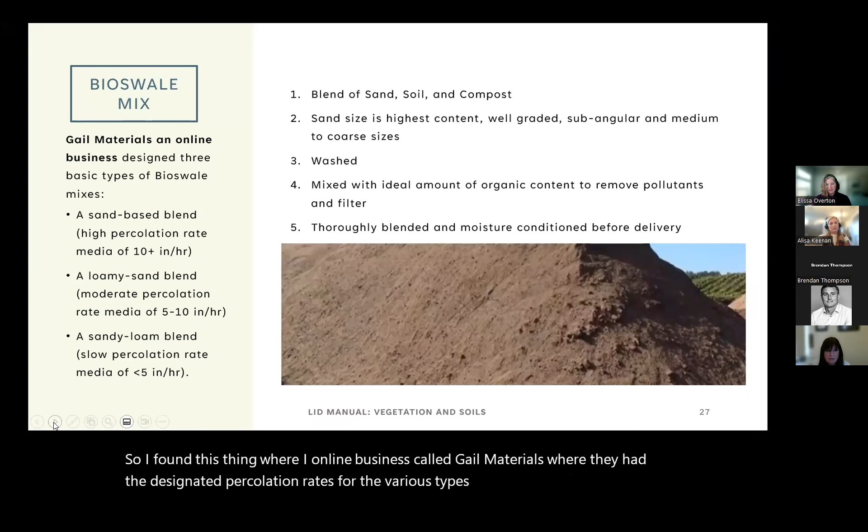So they have a sandy based soil for bioswale soils at 10 inches plus per hour infiltration rate. And then the loamy sand, more of a medium, is like that 5 to 10 inches per hour. And then a sandy loam blend, which has a slower percolation of less than 5 inches per hour. But we want to keep above that 5 inches per hour as our main goal in any of our LID features.

Okay, so let's talk a little bit about topsoil. Do you need it? So, oops, back one. I swear I breathe too hard and it goes.

Okay, there we go. So I hear so many landscapers out in the field say, we have to put topsoil on top of it, or the plants won't grow in those structural soils or in the bioswale soils. Go on to the next one. But if we use the bioswale soils properly, then do we really need topsoil? No, we don't. Topsoil is not engineered for infiltration.

It can have too much organics in it. It may not drain properly. It could have too much clay. We want to keep it to less than 5%. It's best to use the native or the bioswale as structural soil in these bioswale soils. However, they do need some protection against weeds and to hold moisture. Next.

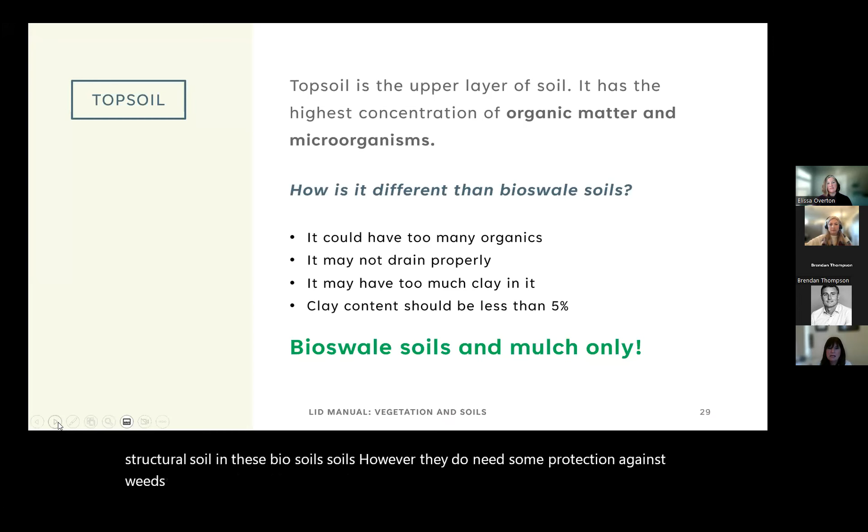So here's a great example of what I'm talking about. Why do we need mulch? Some of these features have so many weeds in them that it's almost impossible to try to keep them looking nice. So from the beginning, we should be using mulch. These are the weeds that were growing in the bioswale. You can hardly even see that there is a drain in there, and they look terrible. But we don't want to use pesticides in them, so let's use mulch.

But what kind of mulch? What makes sense to use in these LID features? Next. Another thing about this photo is this water is going to go directly into this drain without the treatment. So possibly putting the drain at a different spot. Right, definitely. That needs to be part of the next set of standards. But it was supposed to be dug down enough that so many weeds have filled in around it that it doesn't even look like it's raised up, but it was. Yeah.

But anyway, here's the differences between mulch and bark. We really want to use mulch. Mulch tends to be shredded. Composted arbor mulch is the best, and it tends to cling the pieces together. Bark does not. So arbor mulch is best to use for weed control. It's better to trap the particulates of contaminants that we may have, and it works best to retain the moisture. The composted mulch is even better for fire considerations because it's not very flammable. Next.

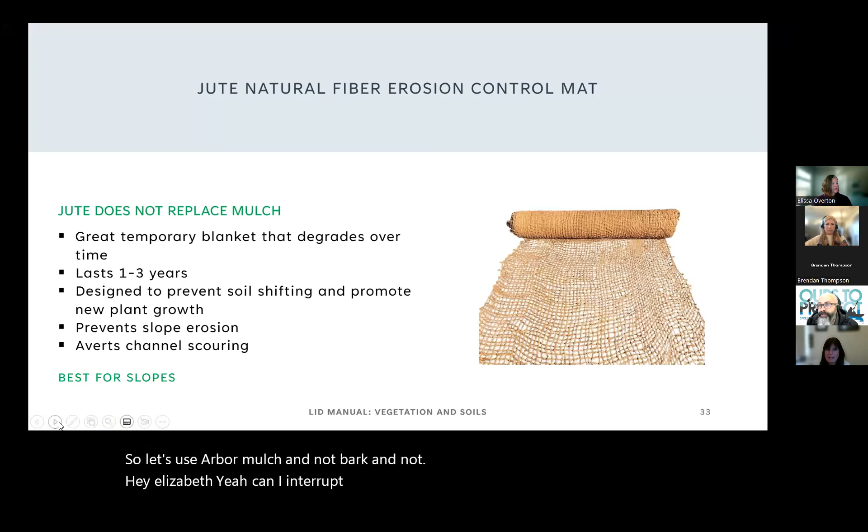Hey, Elissa. Can I interrupt you for a second? There's a really good question in the chat right now from Sam. He wants to know what to do if a landscaper won't warranty the plant list if the bioretention media or structural soil is without a planting layer. I would say let's go talk to him and educate him about what the soils are. That's part of the problem: landscapers don't understand what this soil is and how it's actually designed.

It's engineered soil. It's meant specifically, and it has a certain amount of organics in it. The hydrogel that's put in there actually helps keep the material well mixed. And that's the reason why this soil is so special and needs to be taken care of in special ways, where it's kept covered, it's moisture controlled, all of that. So it goes in well and can be used well. But I think the most important thing is we need to educate them.

Next. All right, let's talk a little bit about construction sequencing with these bioswales and bioretention units. Let's not install these bioswales early. They get run over, they get filled with sediment from construction, and they rarely get protected well enough that they don't have to be reconstructed. So let's wait as long as you can in your construction process before putting these in.

But if you do put them in early, you need to protect them. Like this project showed that they tried to put in the filter fabric over it, but they didn't dig it in. So the filter fabric, you can see it's right next to this slope. This slope has been sprayed, but on the side of the slope over time, the sediment's just going to go right down to the bottom of that slope and right into that bioswale.

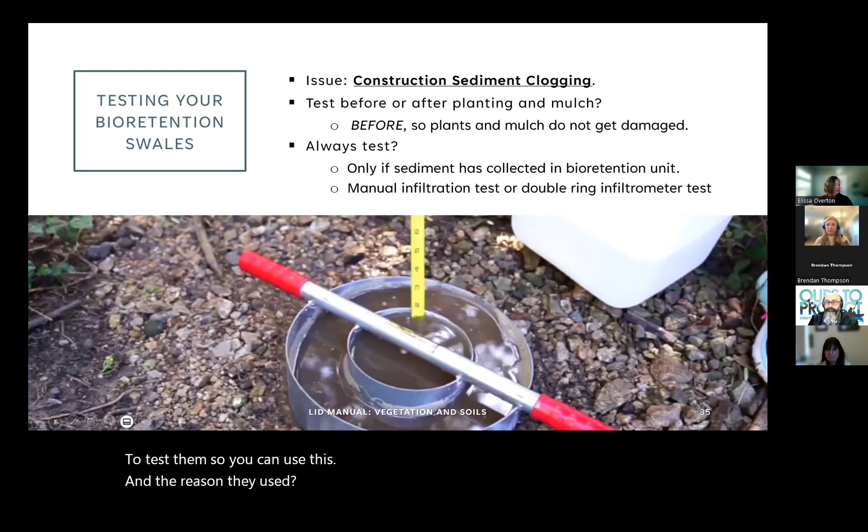Okay, so in summary, the next one. Okay, now I'm just completely dead. Uh-oh. My computer just froze. Oh, okay.

Well, basically, we're just trying to use consistent terms throughout all the documents. We want to be creative. We want to plant plants in the right zones and in ways that are aesthetically pleasing and easily maintained, so the public actually likes what they see, that we enjoy them, but yet they really fulfill their purpose. So let's do a better job of designing these LID features so we can be proud to give them to the public. That's it.

Sorry about that last slide. That's okay. My computer all went blank and all I could see was you guys all of a sudden. So, you know, technology is really nifty sometimes.

Another thing I forgot to mention is when you're maintaining these features, you want to take out that old bark or mulch before you replenish it, because ultimately it's just going to keep raising that level at the soil level, which we don't want to occur. Right. We don't want those organics to get mixed into our soils too much. So Alyssa and I were thinking at least once every couple years, just pull out the mulch and put some new fresh mulch in.

And again, that's very different from a natural resources setting or type environment. But again, we're trying to assist our urban environment and not create a natural environment, but use natural elements in our features to help us out.

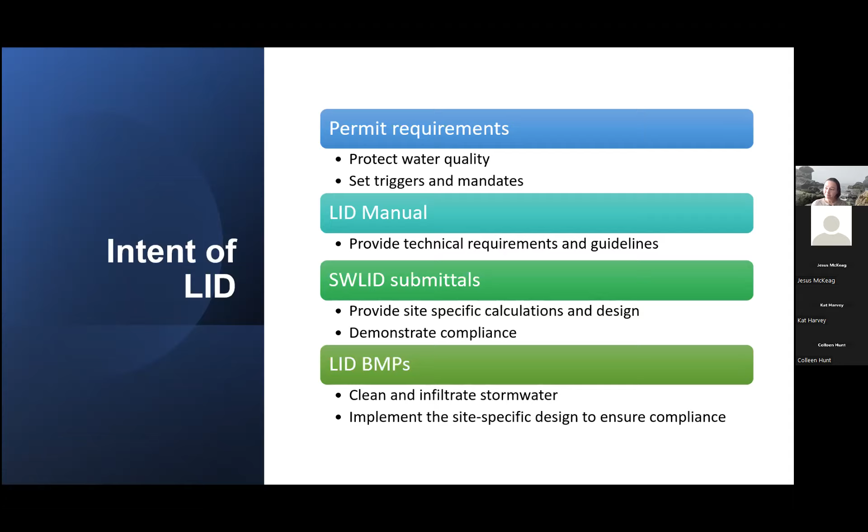So I just wanted to start here, because we're going to come back to the discussion around intent. And then just for a minute to talk about, we all have a role, from the engineer of record who's doing the specific design and ensuring those calculations are sound and the details and requirements are constructible out in the world and that they're going to function, to the legally responsible person, which if there's a CGP involved is actually a designated responsible entity or individual.

And municipal staff, you have all done a fantastic job here of talking through your roles and your responsibilities and review. And then myself and my team, right, the regional board and state board, having roles in making sure that the protection of water quality occurs. So I just wanted to kind of highlight, we all have a piece of making this work out in the real world. So let's spend just a minute here.

We'll talk a little bit about LID. You guys are all super familiar, so I'll just spend a second here. So just really what we're talking about is what the intent of these features are in the real world as they're constructed. They're meant for these more frequent, smaller rain events, the 1 inch or in the northern part of our region, 85th percentile rain event. They're meant to improve the stormwater quality. They're vegetated infiltration-based, small-scale features that mimic the hydrology of the undeveloped site. And they're meant to treat and address pollutants closer to the source, instead of the alternative of a much further off centralized treatment.

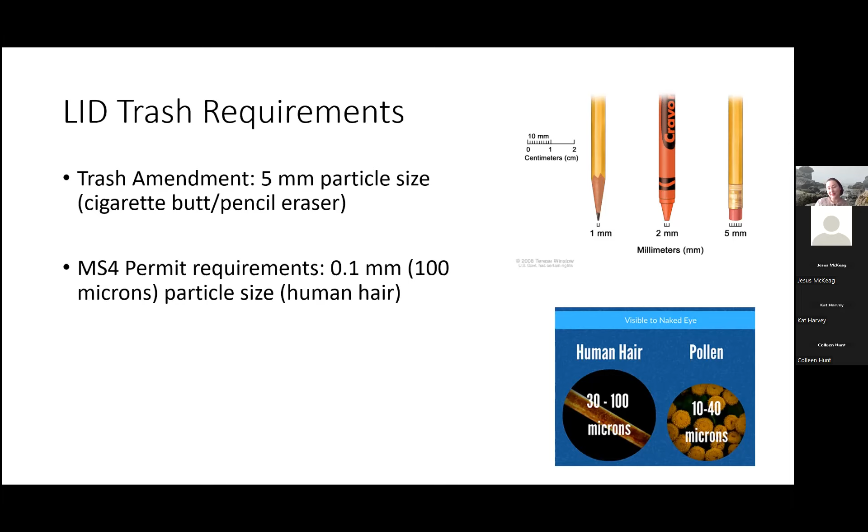And the size of trash that they're talking about is defined as 5 millimeters, which is about the size of a pencil eraser. And there's a list of proprietary devices and separators that are approved by the state board to be used to capture this type of trash. Now within the MS4 permit, which is specific to our region, there's a requirement that's much smaller to address trash down to 0.1 millimeters or 100 microns. This is about the size of the diameter of a human hair. Now, there's no device out there that's going to do that well, but LID does. When we have those features that are vegetated and soil-based, that filter and remove pollutants, this scale of trash and debris can be handled. So I just wanted to spend a minute with that.

Okay, now we're going to turn to the real focus of what I was asked to speak to today. And some of this has been touched on already, which I love because it shows we're all on the same page, and hopefully you won't be tired of hearing some of it. So some of the key issues we are observing with implementation in the real world: plants and vegetation. These plants are necessary, and they are part of the storm drain infrastructure. They have a very important role. And when we have insufficient planting or incorrect plant selection, or they're not properly established or irrigated or dense enough, then your feature isn't going to function as designed, and it's not going to meet the definition of LID. So really pay attention to that.

We had some excellent presentations this morning talking in depth about plants. And again, not all plants are equal. There is within the LID manual Appendix F, which should be utilized when selecting plants, but this is also going to mean you need to coordinate really early with your landscape architect and make sure that your plan sets and your LID submittals incorporate and speak to the planted element of the feature, not just the hard infrastructure pieces.

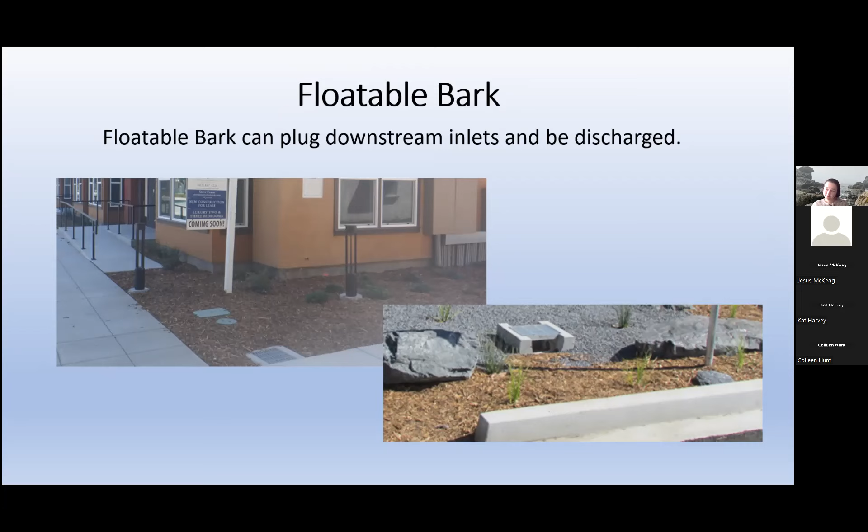I want to spend a little time too talking about the design details within the LID manual. The design details in the manual are intended to provide and illustrate all of the design elements that are required. But as we just heard with the initial and the final, by the time you get to your final design, and maybe even in advance of that in some cases, you need to have a detail that's site specific. You need to make sure that all the elements are there, right? The depression, the high flow bypass, the side slopes, the fine grading elements. But you need to also select the correct criteria, the correct BMPs that work for you, so that you're not intentionally short-circuiting or unintentionally undermining any of the design intent of the LID feature.

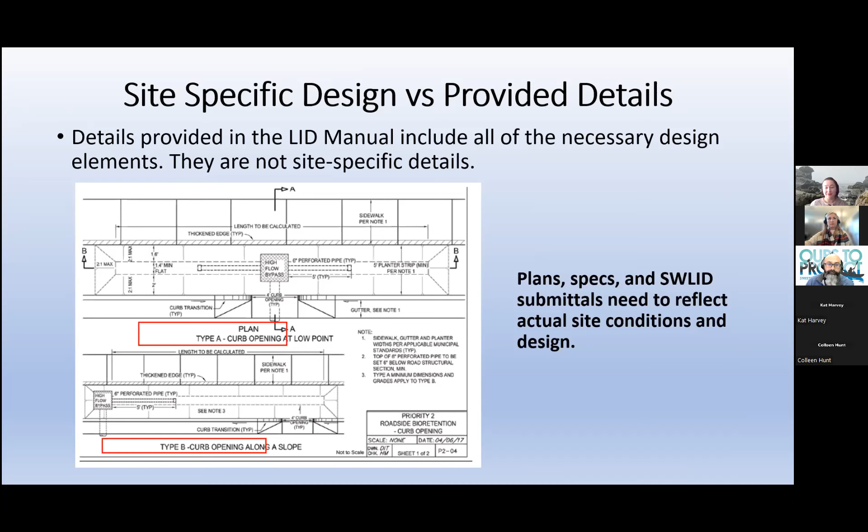Yeah, and that's a great point. I touched on the idea that we want to have site-specific design. But what I would also encourage you to do is provide as much detail as is necessary to make sure that field decisions or field calls aren't going to be made that undermine all the good work that was done leading up to that point. A really simple or small decision in the field, like putting the curb cut in a different location, like this example, undermines all the engineering, design, review, calculations, meetings, and work that whole teams of people put in advance to get a BMP designed to meet all of the criteria.

I'm not saying that's what happened here necessarily or not, but as an example, a very simple field change can fundamentally alter the effectiveness of these BMPs. The same is true when we talk about planting, right? It might not seem to those installing landscaping to be a really big problem to put a plant in a different location. But as has already been talked about, those changes could mean that those plants don't survive because these aren't just landscape strips. These are infrastructure with lots of design nuance behind them.

Okay. Another piece is high flow bypass. So I just want to spend a second there. These features do need to have high flow bypass considered because they're meant to handle and designed for that frequent lower intensity storm event, that 1-inch event. But we get storm events larger than that, right? We still need to think about how we convey that 10, 50, 100-year event and what that does.

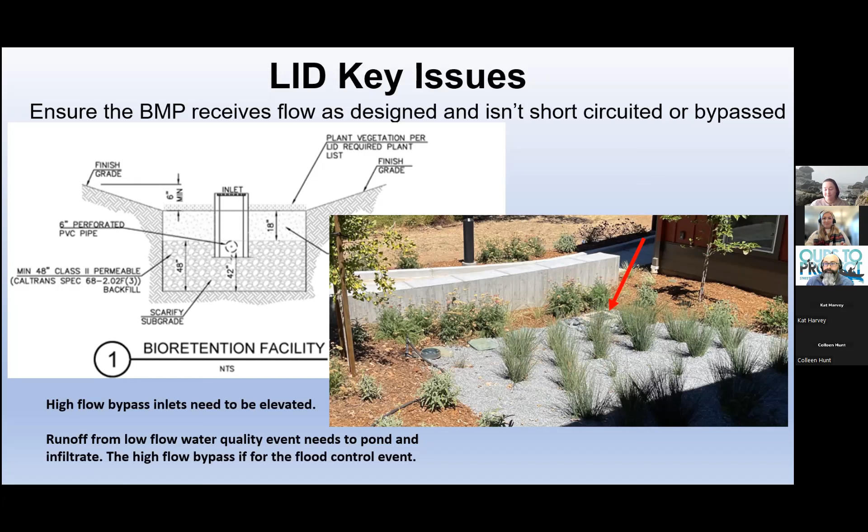Yeah, this is a really common one, I would say, and I'm belaboring, but I very commonly see in my review, and I'll talk a little bit more about that in a minute, bark, lack of elevation change, each of these that we're walking through, lack of vegetation. Okay. And then this is just a couple of other examples. Again, this is an example kind of like that detail we first saw, where that location of the curb opening and where that high flow bypasses can significantly undermine the entire design process to that point, because it's allowing for short circuiting of that flow.

And then just a reminder, we need to think about, there's a few things going on in this photo here, but what is the irrigation plan? What is the planting plan? If we have bubble ups or unique features, making sure they aren't holding standing water, making sure that we're not causing problems by putting in these BMPs, making sure that our curb opening inlets are at the low point and that we're not short circuiting.

So if this entire area is meant to be the BMP and it's calced to be the size required for the BMP, then you need to make sure that the stormwater is going to fill that entire space before it starts to short circuit or to bypass in a higher flow event. It's another just really common challenge and issue with the implementation.

Hey, Evan, we have a question in the chat. It's kind of sort of related, but ponding. Sam Tipton asks, what kind of ponding area / volume is desired when it is not included in the volume capture requirement? When you have a swale versus a flat base, there's a big difference. So it's tangentially related. Yeah, well, and again, so this comes down to, I think, kind of a site-specific design and review. And I'll let anyone else from the cities, counties, the town also speak up.

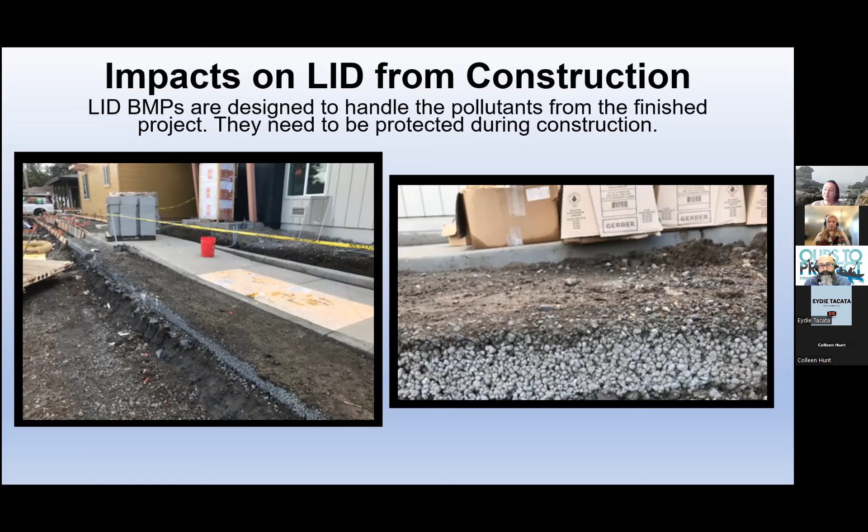So when we have highly sediment laden runoff being discharged into LID BMPs, we end up needing to have them be rebuilt. That's really costly, and it's a huge impact to both the timeline of project completion and also all of the budget considerations. When we have these types of issues, we need to actually, in some cases, bypass or direct runoff around, right? Because these are located, as I already said, in the low point. They're in front of and incorporating the storm drain inlets.

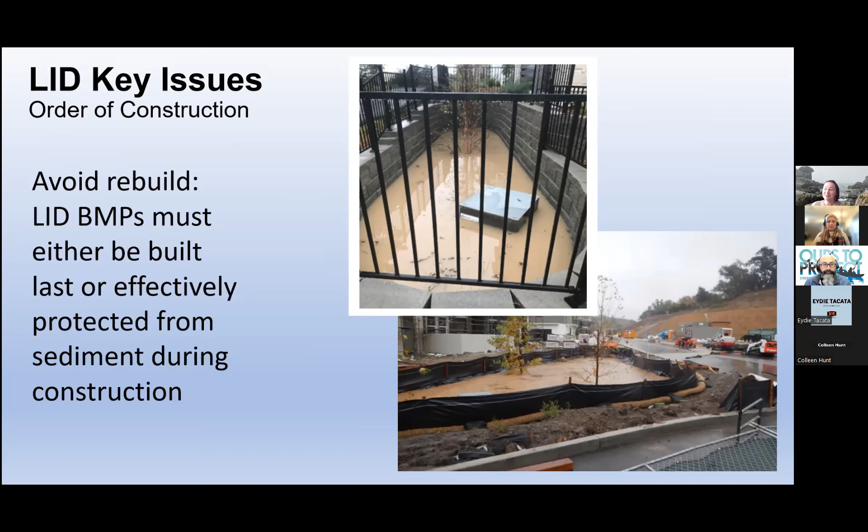So the options are either to protect them robustly, and this one's not perfect, but kind of gives you a sense. Either protect them robustly or build them last to prevent having to reconstruct, tear out, foul, and rebuild these types of BMPs. They're not meant for the construction loading. Also, if you're getting a huge amount of sediment coming in, it's a really good indication that your construction BMPs are insufficient. So that's me putting on another hat for a minute.

Okay, so some of the other common issues I didn't dedicate a whole slide to, I don't want to take up all of our time here, but that we do encounter, are the BMPs not being built per plan, things like geotextiles or visqueen being in them when that wasn't intended in the design. Again, maybe a field decision that negates the intent and function. Them being in the incorrect location or being the incorrect size, maybe a utility pad or a light feature or something like that was added or moved into that feature and effectively reduces its size.

Again, we talked about maintenance a lot, but if there's not a long-term maintenance plan, that can be a fatal flaw. And then another thing I look at, especially when I'm looking at CGP notice of termination considerations, is temporary BMPs still being present within or adjacent to these BMPs, right? Again, they're meant to handle the final site, and the temporary stabilization that happened during construction needs to be complete and no longer necessary.

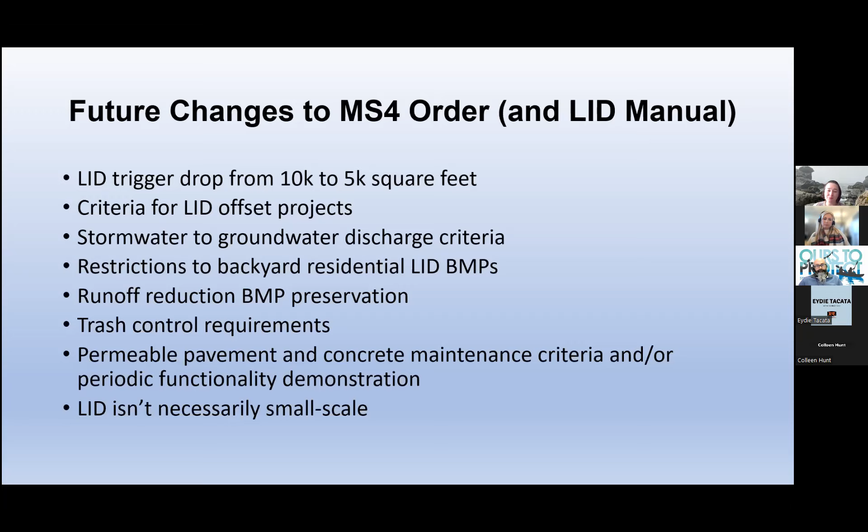But in the future permit, I think that there's also this understanding and iterative process, like we spoke about, of the scale at which these features are going to be sustainable. And so I think moving forward, we really aren't necessarily going to be staying with the smallest scale that we've been functioning at, but some middle ground where we have features that maybe serve a neighborhood or a development in its entirety, or even in some cases larger than that, but that still provide all of those other benefits that we've come to appreciate and refine regarding LID: the vegetated-based, infiltration-based, small pollutant particle size removal, and all of those important elements.

And then a few other things, they're more specific for the engineer in me. Improved LID details, making it clearer about what the details are and what they are not. Improving the structural soil specification so that there's things like sieve sizes and it's a little bit more suited to being a performance spec, to make sourcing that material and field verifying that material easier.

Making sure that we have clear requirements on transfer of ownership when properties are sold. And then again, high flow bypass design criteria and helping to align better with that, once we spent a bit of time on understanding what that ponding depth needs to be and how that high flow bypass functions and under what kind of criteria.

Generally speaking, moving into this next permit renewal, and I hope you all will engage in that process because we need all of your experience and expertise. And please lend what you have learned and struggled with and had success with. But the permit is going to be more specific and about setting criteria, intent, and specificity when it comes to LID.